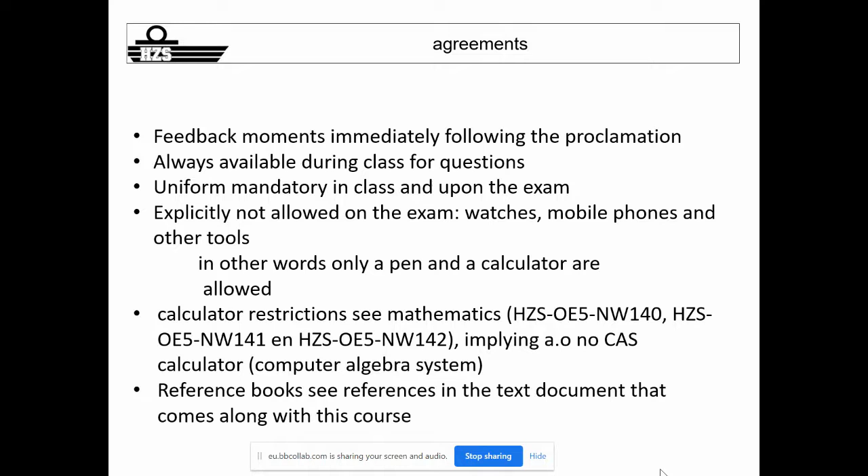Reference books are available, and there are quite some references in the Word document on Blackboard. There are a lot of books available in the library that you can consult. There's a new book used by the professors of stability, which is a good start for background and gives a good idea; it can only help you understand what we're talking about. But that's a bit up to you - it's a bit of homework. I will guide you through the philosophy and the principles, and you have to do it at home.

So what we will see with me: the first three lessons will be on forces on a ship's hull - shear forces and bending moments, which you're already aware of from Ship Construction 1. We will do some simple beam calculations; that will be for today. Next week we will go to a more block-type vessel, calculating shear forces and bending moments like a ship on a simple beam principle. Then in the last course with me, you will do translation from all those forces to stresses.

Because you know that we are not allowed to cross the yield stress - you might still be aware of that terminology from last year. If not, please revise what a yield stress is. You have to stay below yield stresses to keep your vessel intact, so you can only work within the elastic region of your material. You need to have an idea of the stresses. The naval architect will not give stress limits to a captain that he is not allowed to cross, but will express it in shear forces and bending moments.

But as you are here for an academic program, you need to know a bit more than just the basics, which means you need to know what's behind shear force and bending moments, and that the architect will do the translation for you to stresses, and only give you limits for shear force and bending moments, which is quite easy to reason and calculate in a way.

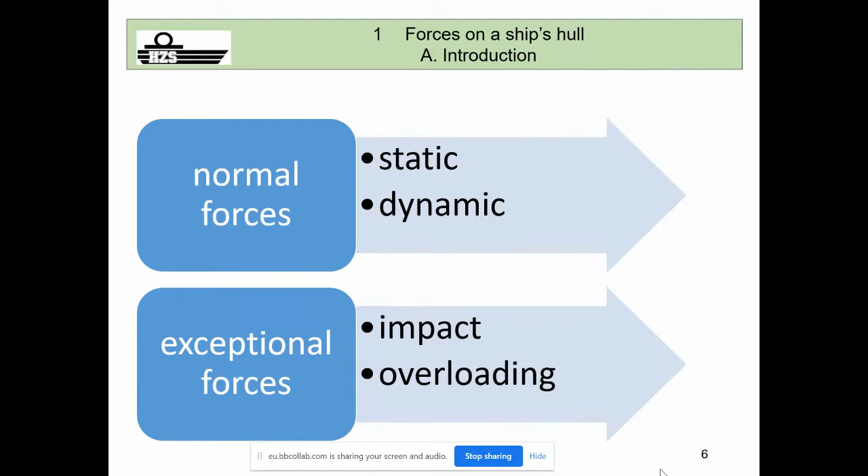Besides normal forces, there are exceptional forces like impact, damage, overloading, which are not normal and considered exceptional. A naval architect will take these into consideration up to a certain limit. Explosions he can't take into consideration - it's not normal to happen, and if it happens, yes, you have damage. That's normal. But the naval architect will for sure take into consideration all the normal forces that your vessel needs to stay rigid and intact, plus exceptional forces up to a certain level limit, not further than that.

Normal static forces, as I told you before, involve weight distribution. Up to now, for transverse stability as you already had, your weight is taken into account as one vector - all the weight as one single figure, one vector acting at the center of gravity of your vessel. This is nice for stability purposes, but when it comes to shear forces, bending moments, and forces leading to stresses on your vessel, we want another approach: we look at the distribution of that vector along the length of your vessel.

The distribution along the length of your vessel is not the same up front as at the back - it's like a mixture of highs and lows over the entire length of your vessel.

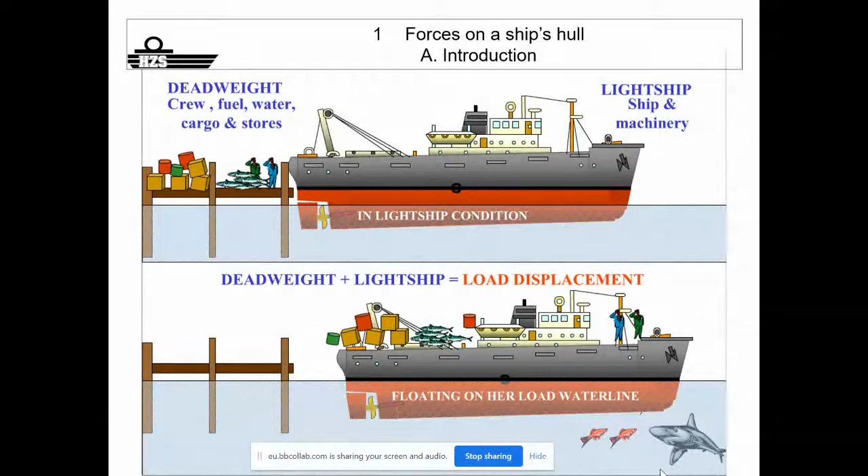What is the total weight? You should know it: light weight plus dead weight equals displacement - light ship plus dead weight. In case you still have problems with this, please do not hesitate to contact me, but you have to know this, as throughout one of the exercises it might really be useful to have an idea about this.

What else is working on your vessel, seeing as it's a static force? It's a buoyancy force. Your vessel, as you know, is not sinking, is not flying, meaning it's being carried by a certain reaction force, which you can see as the Archimedes force, or the buoyancy force.

Up to now, same story. You saw it as one vector of which the height is equal to the displacement of your vessel, the water displacement, which is eventually equal to the total weight of your vessel. This vector has not the same point of application. The weight of your vessel takes place in the center of gravity, the total weight, like my total weight, I also have somewhere a point of gravity in my body where it takes my vector of my total weight.

When it comes to the buoyancy force, the Archimedes force, it takes place in the center of gravity of your underwater vessel. Why? The Archimedes principle states the buoyancy force equals the weight of the displaced water, and the weight of the displaced water equals the underwater volume of your vessel multiplied by the density of the water. So your underwater volume is representative for the buoyancy force, and the center of gravity of your underwater vessel is the reference point for your buoyancy force.

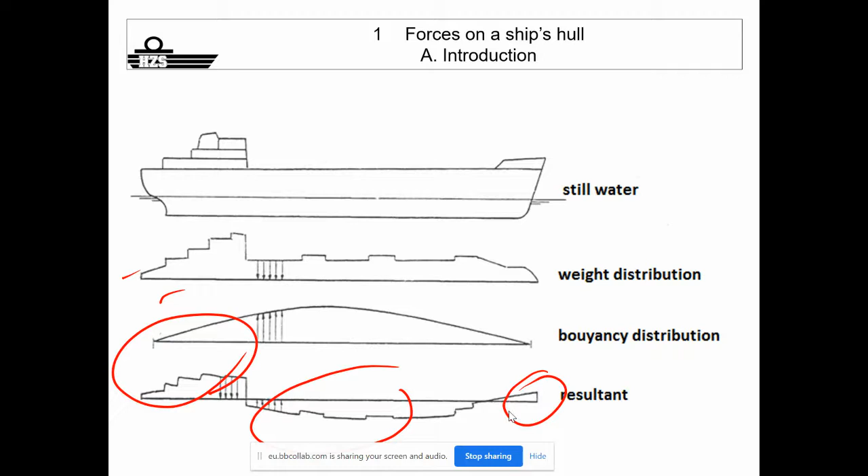of your vessel. An empty vessel, as you will know, has a weight distribution of a minimum ballast condition. Ballast condition is an empty vessel, meaning that all the ballast tanks are filled with water to guarantee a certain weight, a certain minimal stability in a way.

It means that in that way your vessel tends to hog, and with a vessel tending to hog, you see that the resultant forces are more positive in the middle and more negative at the ends, and your vessel is doing like this. When your vessel is fully loaded, you just have the opposite, and your vessel tends to sag due to the static distribution of all the weights.

Beside those statics, you have the dynamics. Waves, green water, this is an example. Slamming is an example.

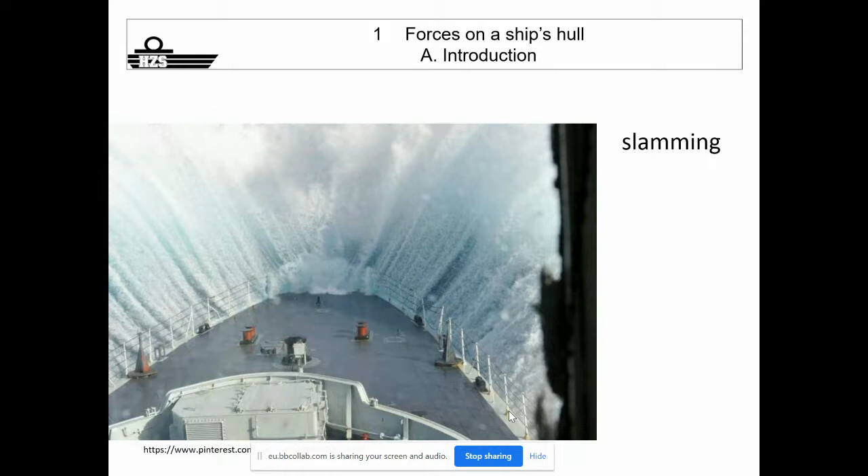So slamming is also part of the operation - as I saw, I just pressed accidentally the mute button, but just in time. So slamming is also part of it. It means that a naval architect has to take into consideration all those forces as well, because all those forces your vessel is also exposed to and will also lead to shear forces and bending moments.

You take 1/3 of the highest waves that your vessel is designed to navigate into consideration, and the average from that is your significant wave height. That's a value which the naval architect will use to calculate all the stresses that your vessel will be exposed to, the dynamic sea state.

Because he has to know all the stresses that you encounter. Very important side note: vessels are designed for certain areas to navigate. Your vessel cannot necessarily just cross the Atlantic if it's not designed for that, your vessel will not withstand all the stresses that come along. A vessel is designed for certain areas. Normally, if nothing is mentioned, according to the rules, it will be in North Atlantic conditions.

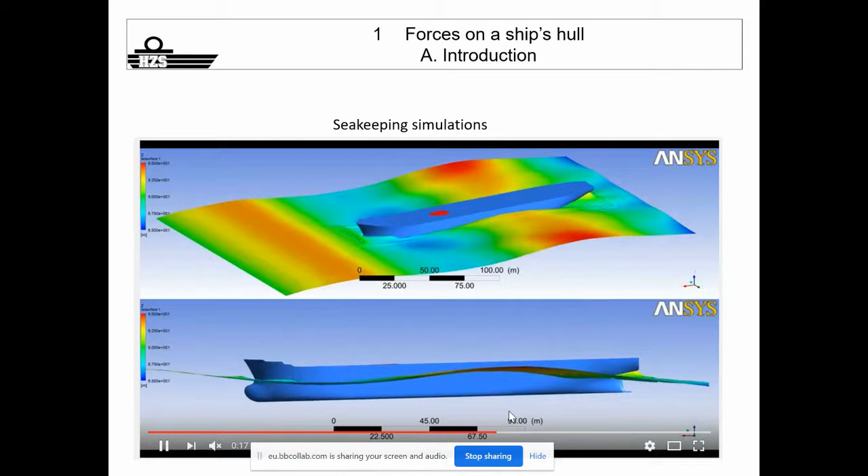Naval architects make use of finite elements to evaluate sea states and stress in the structure. This is always done by simulations, computer-based programs, which are quite good, but it stays an approach. It's only an approximation of reality. You always have to keep that in mind.

We always have to take account of safety margins. Naval architects take into account a safety margin, meaning that you will never use the yield stress as a final limit. It will also be the yield stress taking into account the safety margin. It's very important.

Exceptional forces normally are not taken into consideration for the merchant marine. I'm not talking about the navy, that's different, but for the merchant marine: collision, grounding, explosion, to a certain extent, but there's a certain limit. It's not designed for a full collision or explosion.

So these are things that can happen, and that leads of course to damage, and that's most of the time linked to operational errors from, let's say, the captain, because he has the final responsibility.

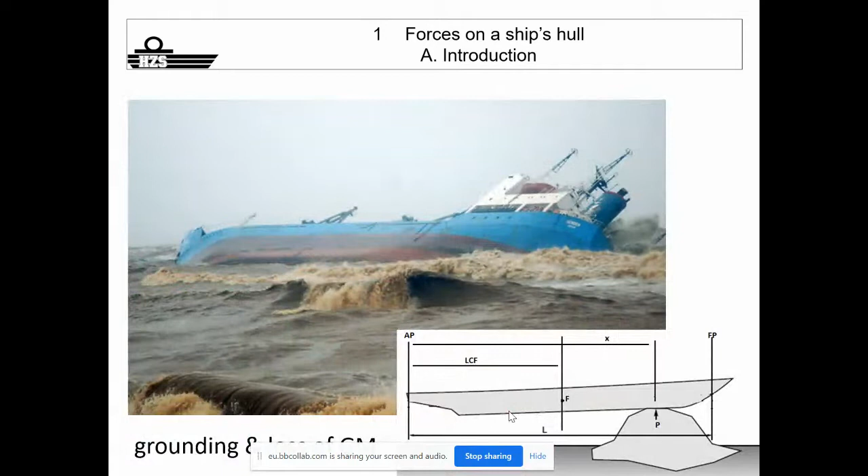Overloading is also something that happens, and which is a responsibility of the people on board, and that's why we treat it. Because all those dynamic things I'm talking about are not within your hands. If you go navigating, you can't control it. It's the responsibility of the naval architect.

But the one thing you can control is how you charge your vessel, how you distribute all the forces. That's why it's important that we teach this to you, so that you have an idea what's going on behind loading and discharging, and shear forces, bending moment, and stresses.

To make the calculations easy on board, what do you have? You have computer programs that do everything for you. Nice and easy, but you have an academic background, so you need to know what's behind it.

To make your life easy and simple, we will always compare a vessel with a beam. A beam can be detailed, so that you really have side shells and girders, like you will see at the end in a Word document. You will have a new exercise for those who already follow the course, like a real profile of a vessel with a tank top, center line girder, side shells, walls with certain dimensions, and then you can do calculations.

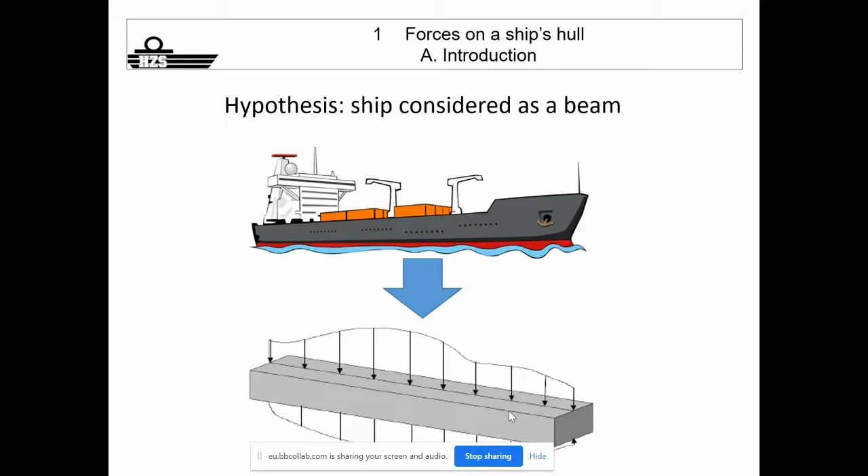You can simplify it even further and compare a vessel with an I-profile beam. So both approaches exist. If you compare a vessel with an I-profile beam, then the top flange is considered as the sheer strake, the top deck. The bottom flange is considered as the double bottom, and the side web is considered as all the longitudinal things running fore and aft.

So meaning the side panels of your vessel and all longitudinal bulkheads, which are quite solid up forth. That's the side web. And if you simplify it like an I-profile beam, the behavior of this beam is really comparable to the behavior of a vessel. And that's why it's easy to use this as an example, and also in exercises, it's a nice approach to simulate what happens on board of a vessel.

So you know that a vessel bends, hogs, sags. Hogging and sagging leads to compression and tension. What you saw in ship construction 1 is that the compression and tension is the highest at the outer flanges. So if you go like this, sagging, then you have tension in the bottom, and in your deck compression. A vessel is not only subjected to hogging and sagging.

As we saw, the weight distribution of our vessel tends to have positive and negative parts, meaning that if you chop it into pieces, all the pieces of your vessel will have a different height in the water, a different freeboard. Meaning that if you glue them all together, you will have tension, stresses and forces perpendicular to your plane. The shear stresses are the highest in the middle in your web. But those are things that we saw in ship construction 1. So it's important that you revise that part, and then you really capture the entire content of what is necessary.

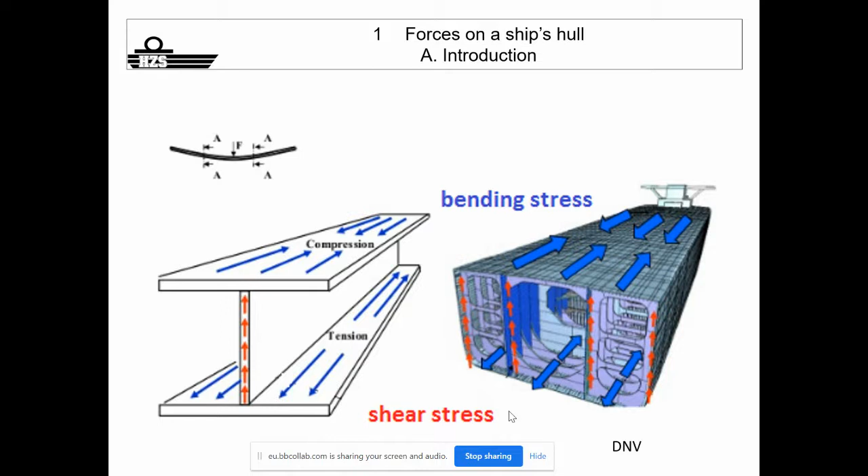You can't just say, oh, I will just do the exercise and that's it, I succeed because Remke's part is only exercises, correct? But you will go navigate. You have quite a big responsibility later on board. So it's necessary that you understand the global picture.

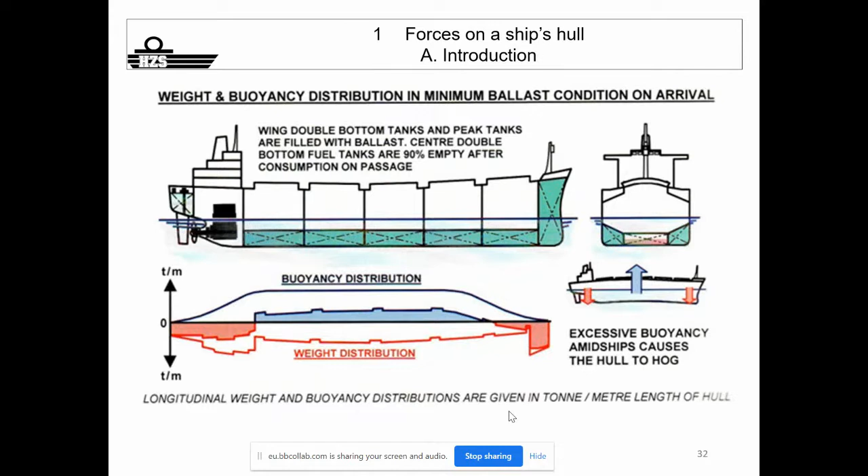So here you see an I-profile beam, and you consider it in this case like the vessel. You neglect Archimedes a bit, and you see it as carried by wave tops at the bow and at the stern. And then the total weight is visualized here as being the biggest in the middle. And it gives you indeed sagging, but also bending moments internally. What is internal and external, we'll come back to that later on. The same goes, of course, with hogging. These are all visualizations you can use, an I-profile beam compared to a vessel.

If you look at the weight distribution of your vessel, you might weigh more at the ends and less in the middle, for sure when you're empty and in ballast condition. Your vessel tends to hog. If you chop it into pieces, what do you see? Every piece has a different freeboard. So wait. If you look at this part and you're located here, what do you see? This part tends to go downwards. But in reality, it's all one piece. So it means that internally, you have at this location a reaction force. And that's the shear force.

So your shear forces you can approach as a result from external forces, which is the weight in this case. And then internally, your material has to counteract because it doesn't want to crack. It's all glued together. And that's the shear force. Another way, you can see this pen. What does it also do? This is your person, and this is the end of your vessel. This pushes downwards. What do you see happening? You see a moment happening. It tends to angulate this part. In reality, it's all glued and stuck together.

So besides only shear forces, this is trying to turn downwards, and you will have a reaction force to counteract. So you also have bending moments to counteract the bending moments that your vessel is exposed to. And those internal shear forces and bending moments lead to stresses, and those stresses should not be higher than certain limits. And that's actually the red line through the entire story.

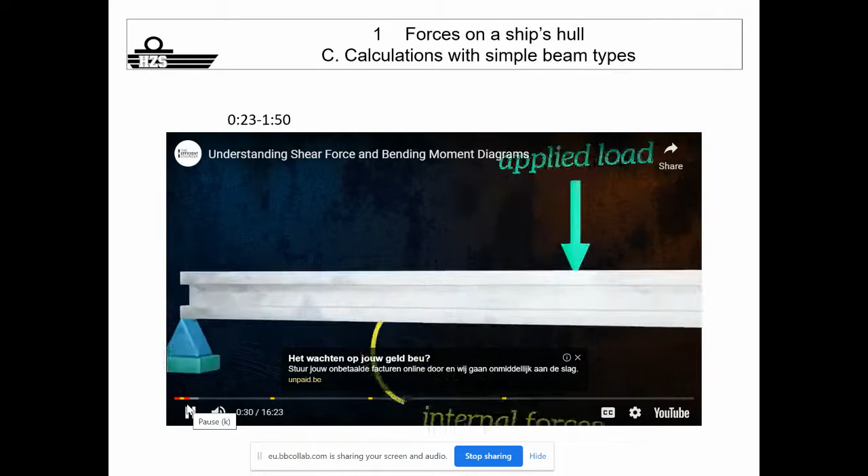When a beam is loaded, internal forces develop within it to maintain equilibrium. These internal forces have two components. We have shear forces, oriented in the vertical direction, and we also have normal forces, which are oriented along the axis of the beam. If the beam is sagging, the top of the beam will get shorter, and so the normal forces in the top of the beam will be compressive.

The bottom of the beam will get longer, and so the normal forces in the bottom of the beam will be tensile. Each of the tensile normal forces has a corresponding compressive force, which is equal in magnitude but opposite in direction. As such, these forces don't produce a net normal force, but they do produce a moment. This means we can conveniently represent the internal forces acting on the beam cross-section using just two resultants. One, shear force, which is a resultant of the vertical internal forces, and one bending moment, which is a resultant of the normal internal forces.

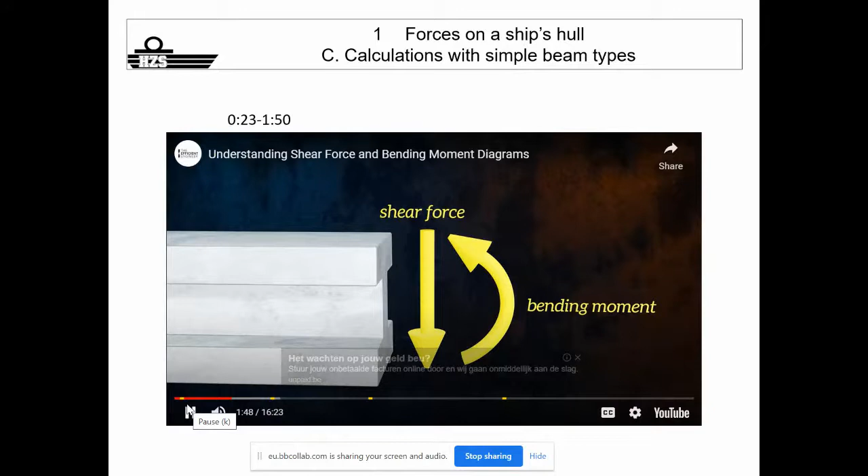This is a very common way of representing the internal forces within a beam. Drawing the shear force and bending moment diagrams is just figuring out what these internal forces are at each location along the beam. These resultant shear forces and bending moments will depend on the loads acting on the beam and the way in which the beam is supported. Beams can be loaded in a number of ways.

Okay. Voilà. Sorry, I have to switch back to English.

So this is another approach of explaining that indeed, if we talk about shear forces and bending moments, that will eventually lead in the third course to the calculation of stresses. We always consider the internal shear force and bending moments, which should not rise above certain limits, otherwise you have failure. And for sure, when you enter the plastic region, then it's considered as being failed, because we do not want permanent deformation. Elastic deformation is normal, but permanent deformation we do not want to reach.

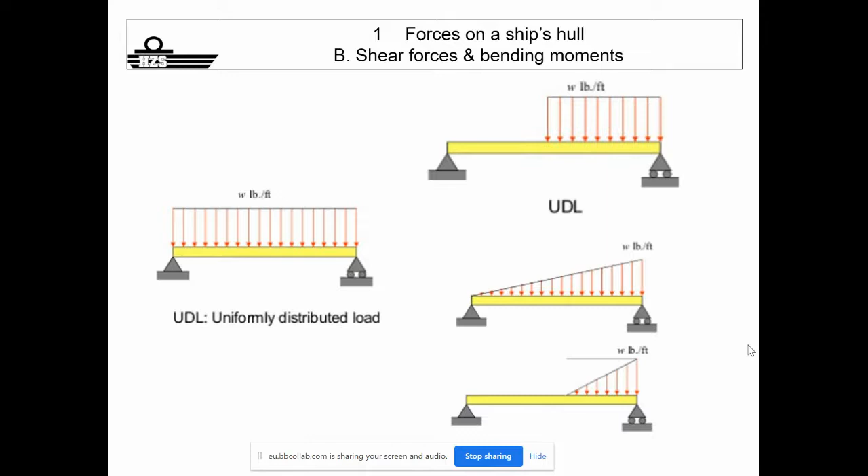Okay, how do you have to see loads in the calculations we will make? We will do simple beam calculations for today. Then you will see concentrated loads or point loads. It's like, for example, a car on a deck. Every wheel will have a certain point load. You will also see uniformly distributed loads, like for instance a freshwater tank filled with water, which means so many tons divided over the floor of the tank. So it's a uniformly distributed load. The same we can translate to simple beam calculations.

On board, most of the parts will be considered as being clamped on both ends. You do not have free ends, you have both fixed ends, but you can also have in beam calculations a free end and a fixed end. You have panels which are supported by, for instance, reinforcements, girders. They reinforce the tank top, and then you have supports, that's also possible, and you can simulate all that as well by simple beam calculations.

If you look here, how to calculate those internal shear forces and bending moments, I told you they relate to the external forces, and this is a nice visualization. You see here a beam fixed in a wall and free at the other end. At the end, the beam is being pushed upwards by a certain force P. So your beam tends to go upward, but nothing happens because it's in equilibrium. That means that internally, if you're a fiber in that beam, you have to counteract that force with a certain internal force.

And then you see this here. No, I have to be here with my pen. Internal force V. For the beam to be in equilibrium, the reaction force has to be the same as the external force. So you can easily calculate the internal shear force on the basis of the external force P. What is the moment? Imagine yourself positioned in that cross section, MN, here. Somebody pushes upwards.

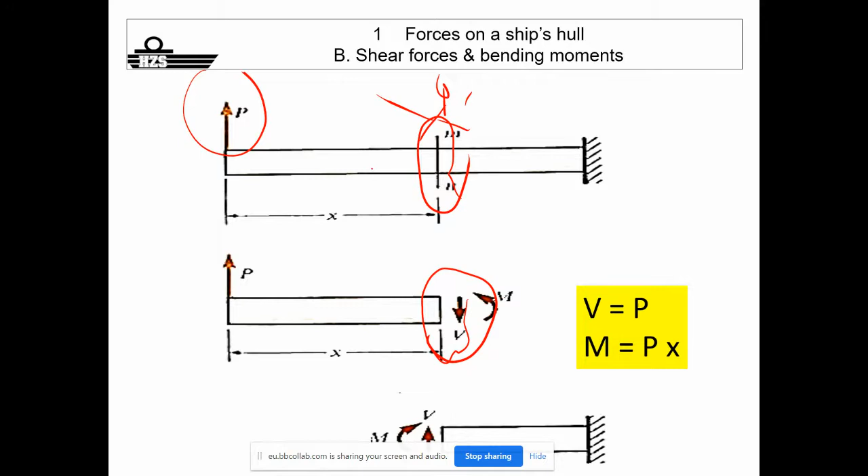What do you see? This beam has a moment that tends to do this. How do you define that moment? The moment is force multiplied by arm. It's P multiplied by that distance x. Here, distance x. Yeah?

For your beam to be in equilibrium, that internal moment at that position where you're located, the cross section MN, equals what? P multiplied by x. It has to counteract that moment to be in equilibrium. And that's the basics. So the external forces will determine what happens internally, what you have to counteract. And those forces and moments eventually will lead to tensions that have to stay below limits that the naval architect will give you.

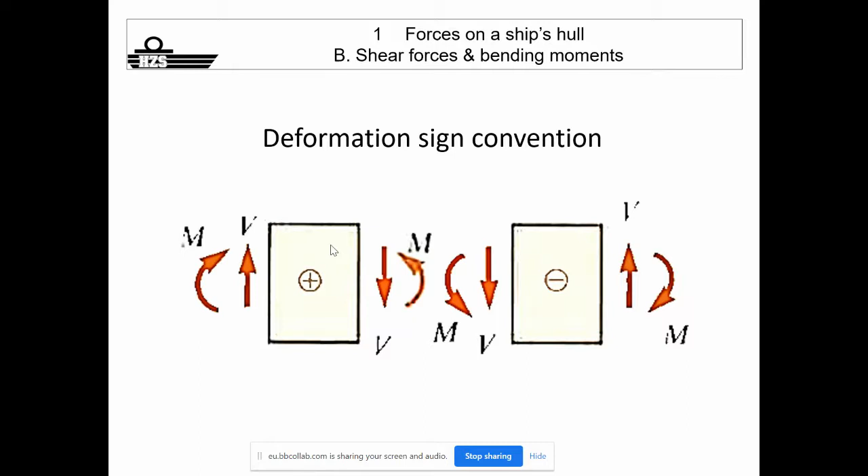Sign conventions: since we do exercises, of course, we need to keep to a sign convention. We have deformation sign conventions. You can do it depending on happy faces, sad faces. Usually I use the static ones. The static ones means that everything which is tensile is considered positive, compressive is negative. All the forces acting upward are positive, downwards I consider as negative. For moments, if you go clockwise, positive, counterclockwise, negative.

In a way, you can do whatever you like with those sign conventions. Just put somewhere on a piece of paper the convention that you use and use it throughout the entire exercise. That's the most important thing. If you swap in between, your answer will not be correct. So use a sign convention and use the same approach for your entire exercise. Eventually, your result can be positive and I have negative, or vice versa. It's no problem because the absolute value is the one that is necessary to take into consideration to calculate eventually

stresses. Your stresses can be tensile, can be compressive. Both should be below the yield stress. Whether we're talking about tensile or compressive, it doesn't matter. Both have to be below the yield stress. So I'm not so strict in the sign convention. Positive and negative can be swapped as long as the absolute value is correct. And you can only guarantee this by using the same approach over your entire exercise. Okay?

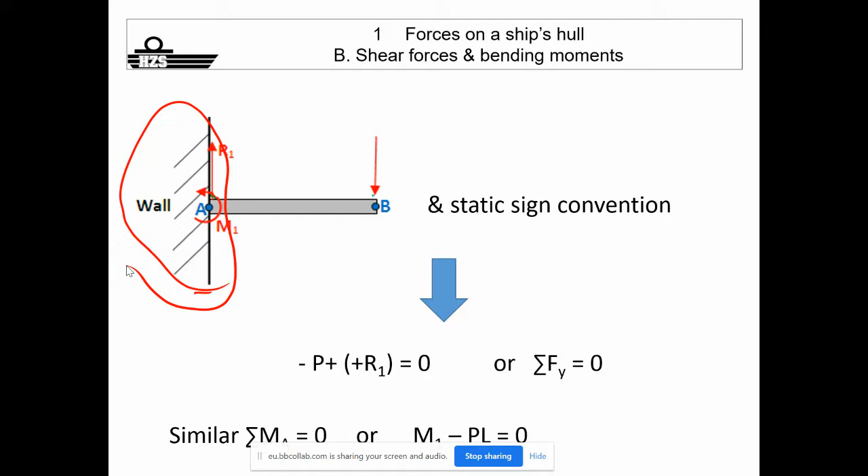So you have a reaction force considered as an outside force upwards when your load here at the end is downwards. You have a reaction force on the wall going upwards. This moment tries to move you this way, so you'll have a reaction force in the wall because it's not happening. That reaction force in the wall is also considered as an outside force. And the sum of all those forces has to be equal to 0. It will be one part of the exercises. Yeah.

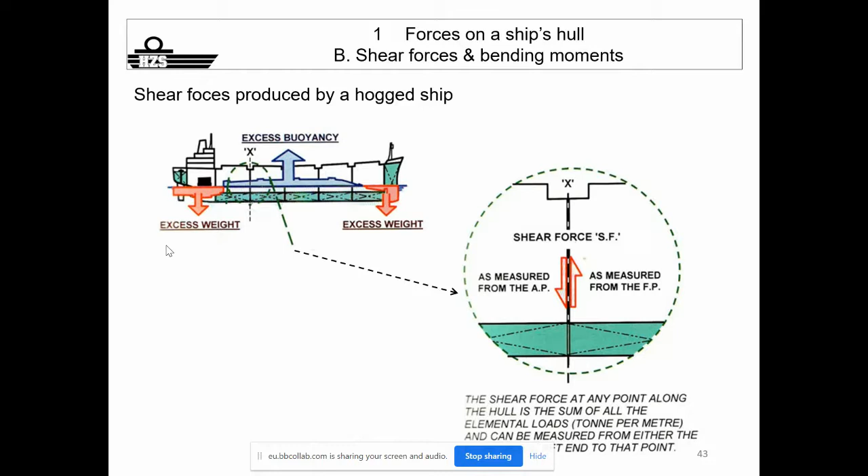Shear force produced by a hogging ship. Same here. The Archimedes force carries your vessel and is considered as an outside force. The weight of your ship is considered as an outside force. All those outside forces lead to internal shear forces and bending moments in your vessel. Okay? And that we will eventually calculate. Shear forces, bending moments, how to calculate. I will go straight first to the beam exercises and then I will come to this, or you can look at this later on, then it will become clear what it means.

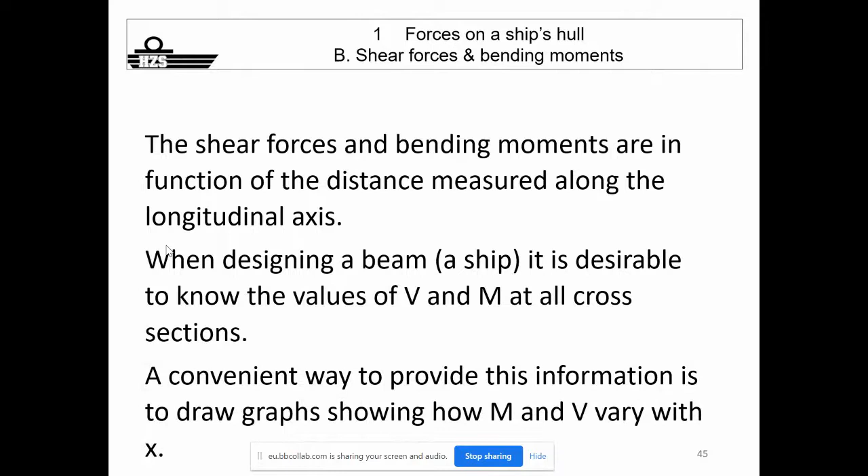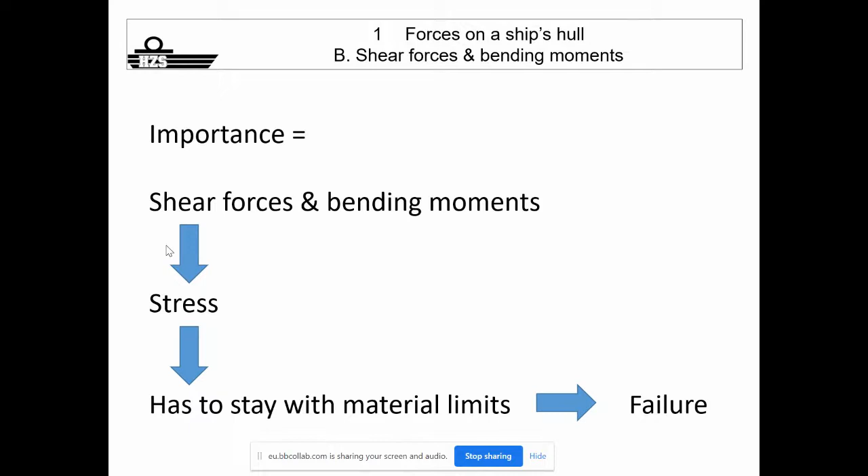Okay. How do you calculate shear forces and bending moments? This will eventually lead to a vessel. This is computer-based programming that will illustrate it on board, but you need to know the principles, comparing this vessel with an I-shaped profile beam. The importance, as I told you, is that they are linked to stresses, and stresses have to stay within limits, otherwise you have failure. You have to stay below the yield stress, within the elastic region. And that's the red line through all the exercises.

The roller support allows your beam to move left and right, and it allows your beam to have a moment. It only restricts movement in the vertical direction, meaning a roller support leads to a virtual external vertical force, because it limits movement there, and you eventually have a reaction force in that support.

A pin support will also restrict the movement of your beam in the horizontal plane, meaning movement left and right. So with a pin support you will also have restrictions at that level, and you have a reaction force, also considered as an external force.

When you go to fixed beam supports, as I told you before, you also have a moment to take into consideration, besides vertical and horizontal forces. Why I tell you all this will become clear when we come to example exercises.

Okay, a small introduction, or a summary in another way. Let's put it that way.

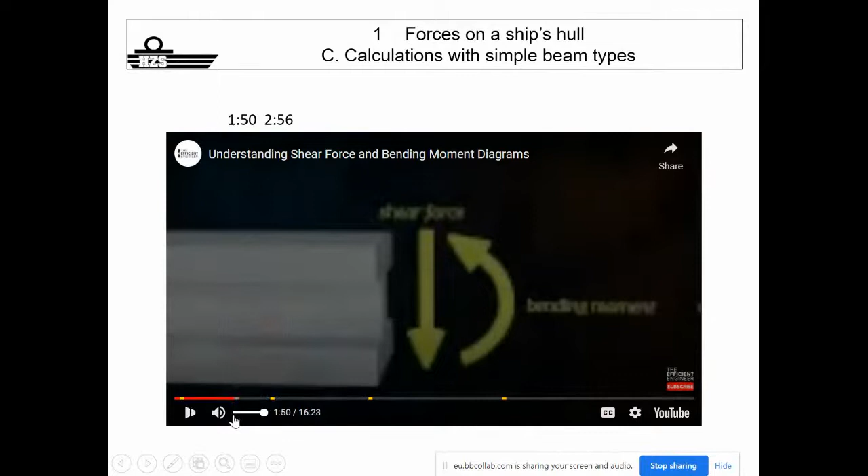A beam can be loaded in a number of ways, the most common being concentrated forces, distributed forces, and concentrated moments.

Beams can also be supported in a number of different ways. They can have pin supports, roller supports, or be fully fixed, which each restrain the beam in different ways. Pin supports prevent vertical and horizontal displacements, but allow rotation. Roller supports prevent vertical displacements, but allow horizontal displacement and rotation. Fixed supports prevent all displacements and rotation.

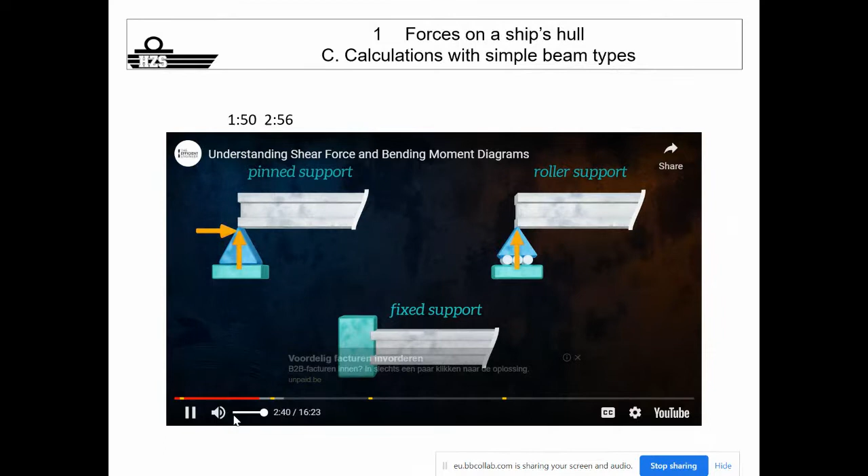If a certain degree of freedom is restrained at a support, we will have a corresponding reaction force or reaction moment at that location. For example, rotation is permitted for a pin support, so there is no reaction moment, but displacements in the vertical and horizontal directions are prevented, so we will have horizontal and vertical reaction forces.

So how do you determine the shear forces and bending moments within a beam?

Now, beams can have more than one support. A cantilever beam is only fixed in the wall. Fixed beams are fixed on two sides. Simply supported beams, which is most of the cases we will consider in the exercises, have one end freely moving in the horizontal plane and the other pinned. So your beam with a simply supported condition can move and can elongate depending on the stresses and forces being applied to it.

That, in the exercises, just to simulate what happens and what's all behind, is sufficient for now. And I only have with you three contact moments, six hours, which is not a lot, so we have to make some decisions and see what we treat and what we do not treat.

Classification of a beam: statically determined, that's what we are talking about. So your beam is in equilibrium, meaning the sum of all the moments is equal to zero, and the sum of the forces is equal to zero in the horizontal and vertical plane. That's the basis to be statically sound and statically okay.

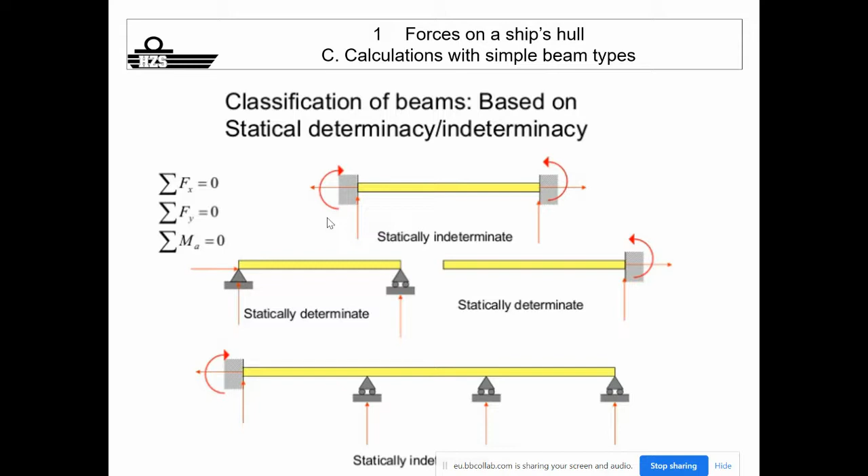And then you can go and look into what happens in the structure itself. What are the moments and forces in the structure? What are the stresses coming along, and do we stay below the yield point? That goes beyond this. Okay, a little continuation.

So how do you determine the shear forces and bending moments within a beam? There are three main steps we need to follow. First, we draw a free body diagram of the beam.

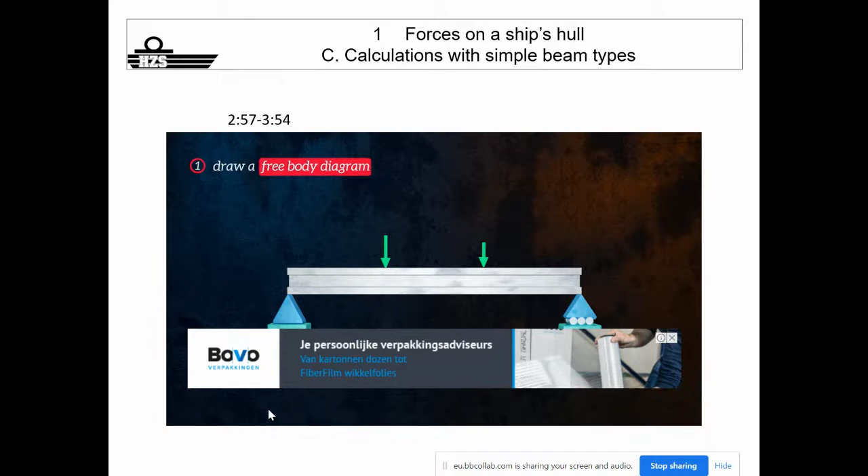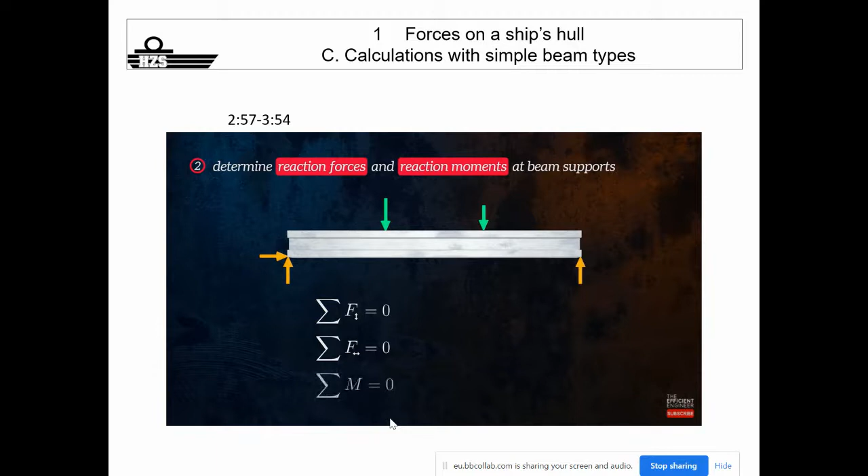This shows all of the applied and reaction loads acting on the beam. The next step is to calculate the magnitude of the reaction forces and reaction moments at all of the beam supports. We do this using the concept of equilibrium. To maintain equilibrium, all of the forces in the vertical and horizontal directions should cancel each other out, and similarly, all of the moments acting at every point along the beam should cancel each other out. This gives us a set of simple equations we can solve to calculate the reaction forces and moments.

If we can calculate all of the reaction loads using the three equilibrium equations, the beam is said to be statically determinate.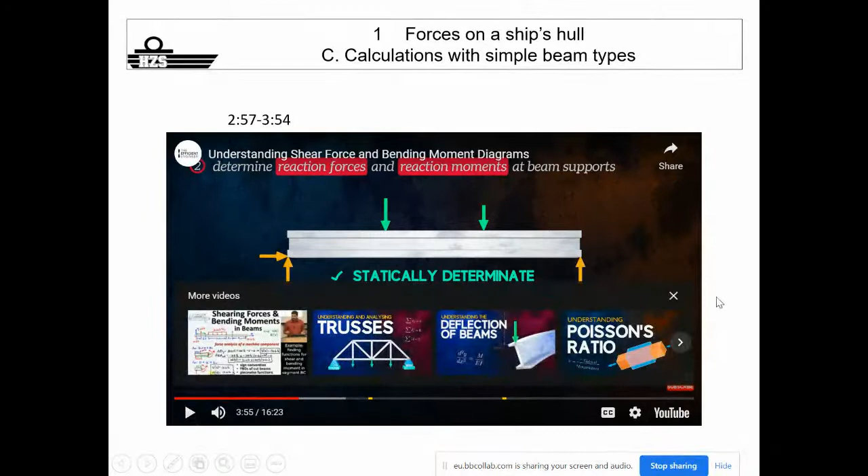For some beam configurations, like this, and that's it, we will only do this type of exercise where it's indeed statically nicely being able to calculate.

For example, what do you see here? A simply supported beam with a weight in the middle, considered as a concentrated load in the middle with a certain force W.

When you press in the middle of that beam with W, you know that your reaction forces in your supports, roller and pin support, in the vertical direction equal how many? What is R1 and R2? If you look here, you press with a point load W in the middle. You have a reaction force due to the pin support in the vertical direction. This one I call R1, this one I call R2. What is the height of R1 and R2?

Logically, most of you will say 50-50. Then you just divide it 50-50, which is correct if your point load is perfectly located in the middle. Then R1 and R2 are indeed equal to 50%, 50%. But it's not necessarily correct. If your load W is not perfectly in the middle, then R1, R2 will not be exactly 50-50%. Then the division will be different.

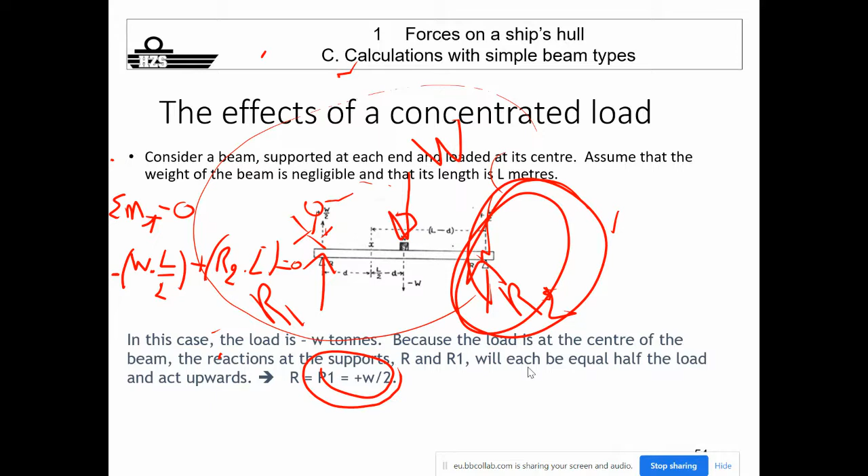If not, it's 0. So actually my point giving is easy: philosophy and figures correct, all the points. Philosophy correct, one simple error in calculation, you get half of the points. All other scenarios, 0. So if you make 4 errors in calculation, you also have 0. That's how I reason and how I correct your examination at the end.

And here you see the solution: how you do the approach with the moments around A, the moments around B, and the sum of the forces in the vertical direction.

Is there somebody who does not understand this philosophy of how to calculate the reaction forces at the beginning and end of your beam, where you have the supports, which are considered external forces? So far, so good. Okay, perfect.

The same principle and philosophy you will have to use when your weight is not perfectly concentrated in the middle, but located somewhere else.

Here you see an exercise in the course with actual values instead of x's and y's and R1 and R2. What do you see with those values? The shear forces. How do you calculate them?

We started by calculating the external forces here. We have 20 kilonewton, which your simply supported beam is exposed to, perfectly located in the middle, so we know it's a 50-50 division for RA and RB: 10 kilonewton on each side. That is all the external forces your beam is exposed to, and that you can calculate now.

What is now the shear forces evolution over your beam, and the bending moment evolution over your beam?

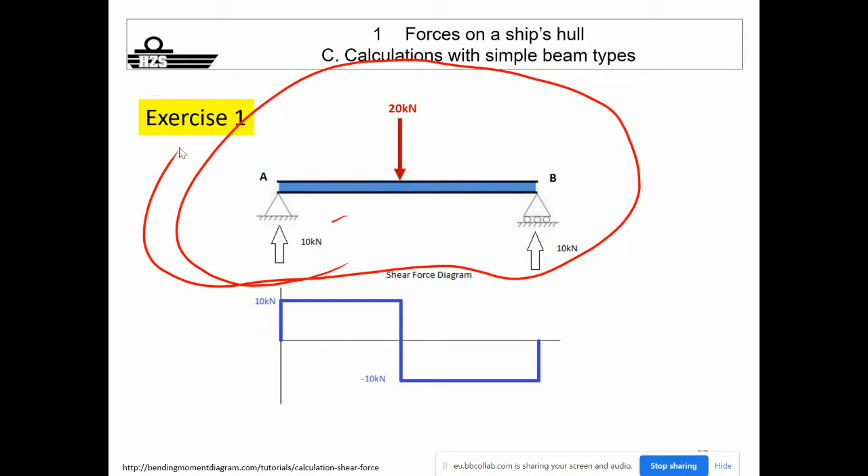Well, to know the evolution of your shear forces, you have to imagine that you're a microbe that crawls into your structure. First of all, you're located at this point.

If you're located just a fraction of a millimeter before your beam starts, then it's zero. But suddenly, just a fraction of a mathematically undefined distance from your start, you see that there's a force pointing upwards, an external force of 10 kilonewton, that has to be counteracted by your material in order to be in equilibrium.

That's why it's very important to make the distinction between external and internal forces. In our calculations, to look at the internal stresses, we need the internal forces and moments, which are linked to the external ones. So the internal force here has to be equal to 10 kilonewton to be in equilibrium.

Now, I'm a fiber that goes further along the beam, and I position myself here. What is the force that I need to counteract? Again, 10 kilonewton. So it remains 10 kilonewton just up to this point.

Up to this point, you will have to counteract not only 10 kilonewton, but also suddenly 20 kilonewton. So you have a drop and you go to minus 10, because 10 minus 20 is minus 10. If you're located here as a microbe inside your beam, you have to counteract all these forces, which is minus 10, and it remains minus 10 just up to the end.

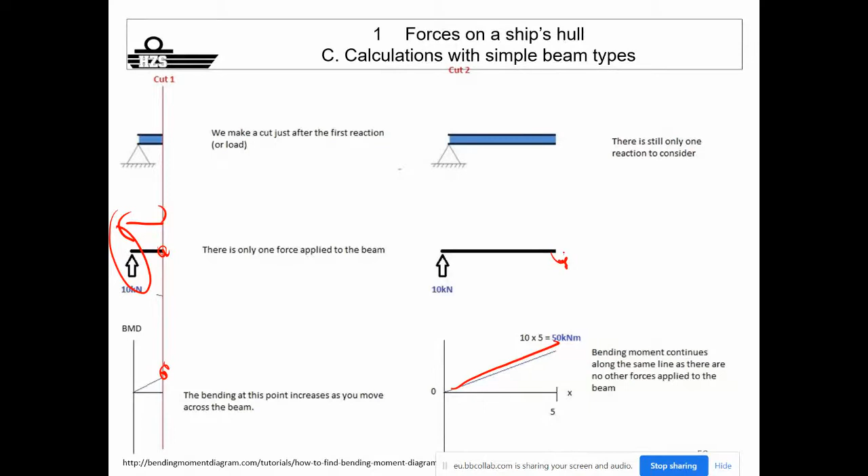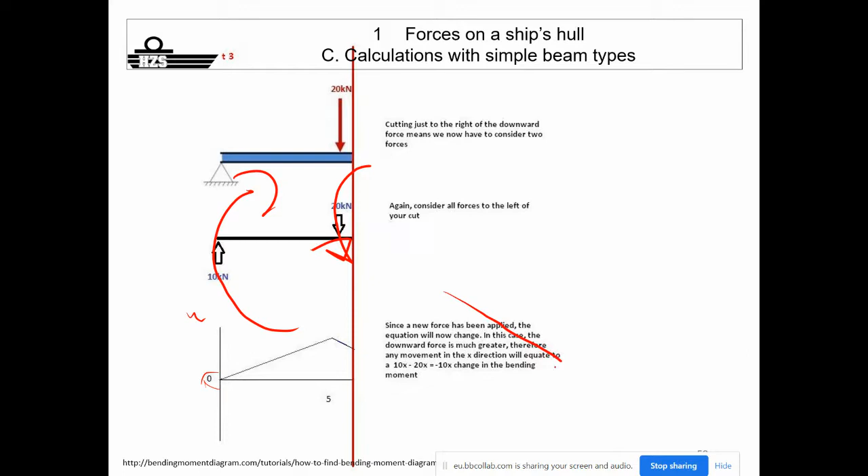And that's the approach of bending moments, and that's how you visualize bending moments. This is the total picture. Now, another approach, but explained by somebody else, in case you are not yet following what I was talking about.

Shear force. One second. Somewhere here should be... play. Calculated all of the reaction loads.

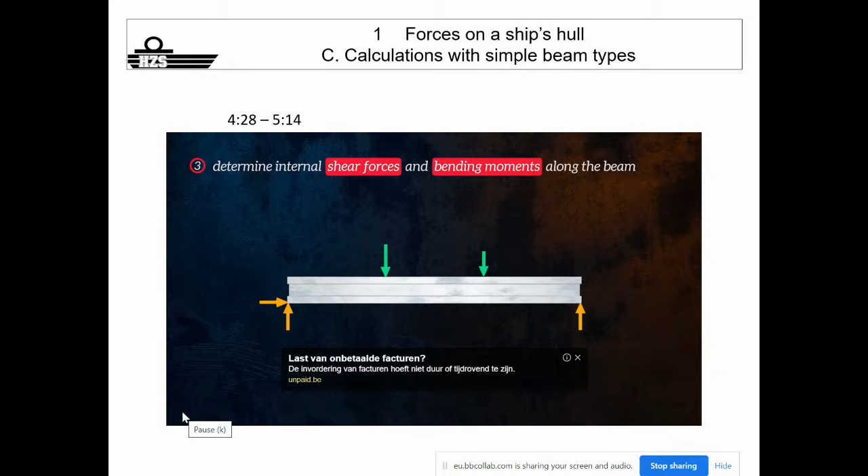The third and final step is to figure out the internal shear forces and bending moments at every location along the beam. To do this, we will use the concept of equilibrium again. If we cut our beam at any location, the internal forces and moments need to cancel out the external forces and moments so that equilibrium is maintained. This allows us to easily calculate the shear force and bending moment at each location along the beam. All we need to do is start from one side of the beam and move the location of the cut along the beam, calculating the shear forces and bending moments as we go.

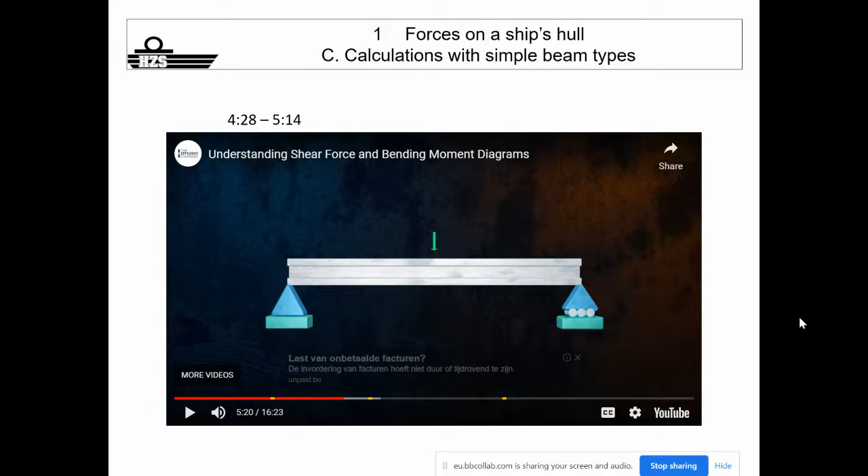Not for now. Okay, so you always have to look at external forces, they will give you internal forces, and it's the sum of all the forces, sum of all the moments that you need to counteract looking from one side, left or right, that's up to you. Yeah, you can choose.

Oops, that's not it. Here. Then you have an exercise of which you have the solution, because you will have to do it at home, of a point load not exactly located in the middle, but somewhere at 2/3 of the length.

You will need to calculate your reaction force. In this case, your reaction force is not 50-50%, so it will be a bit more on one end than on the other end. Following the same principle as before, calculate the sum of the moments around A, the sum of the moments around B. You come to an equation and you will find RA and RB. Exactly the same principle as before.

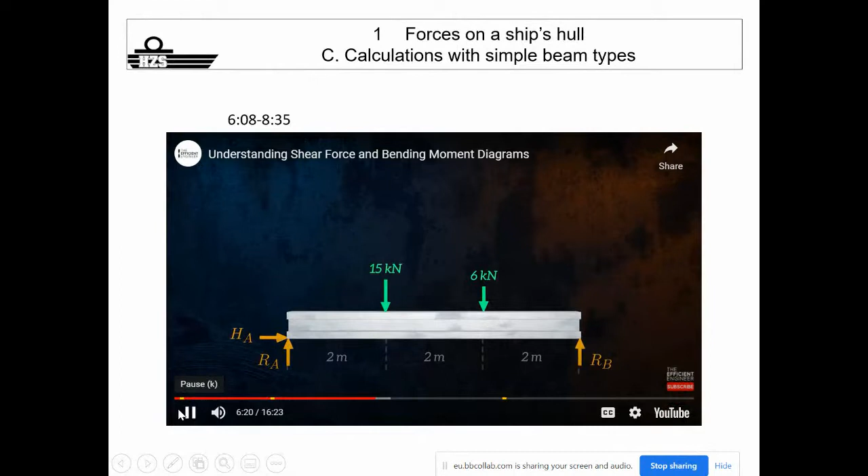We can then use the equilibrium equations to determine the unknown reaction forces at point A and point B. The sum of the forces in the vertical direction is equal to 0. So RA plus RB is equal to 15 plus 6. Because HA is the only horizontal force, it must be equal to 0.

We also know that the sum of the moments about any point along our beam must be 0. Let's consider the moments about point B. That gives us this equation, which we can solve to determine that RA is equal to 12. By substituting RA into the previous equation, we can deduce that RB is equal to 9.

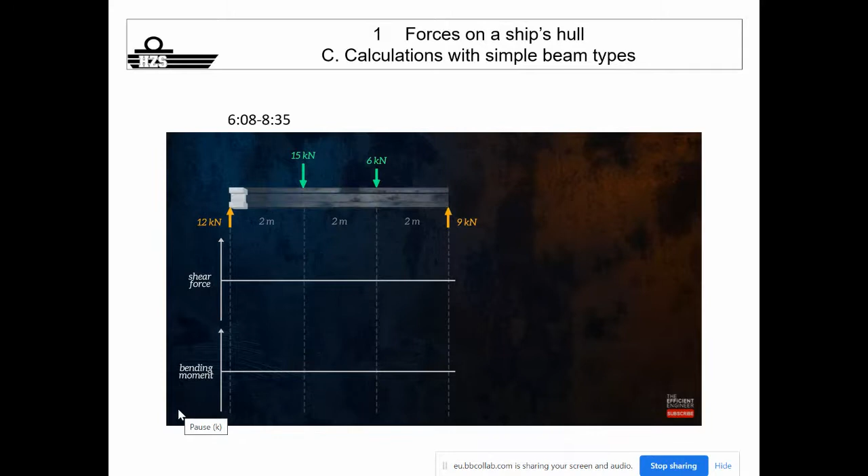Now that all of the external loads acting on the beam are defined, we can draw the shear force and bending moment diagrams. We will start from the left-hand side of the beam. Let's draw the free body diagram for a location immediately to the right of the 12 kilonewton reaction force.

To maintain equilibrium, the shear force must be equal to the reaction force. We can draw this on our shear force diagram. The shear force will be constant until we reach the next applied force. The bending moment must be equal to the 12 kilonewton reaction force multiplied by the distance x to the reaction force. This gives us the equation for a straight line, which we can draw on our bending moment diagram.

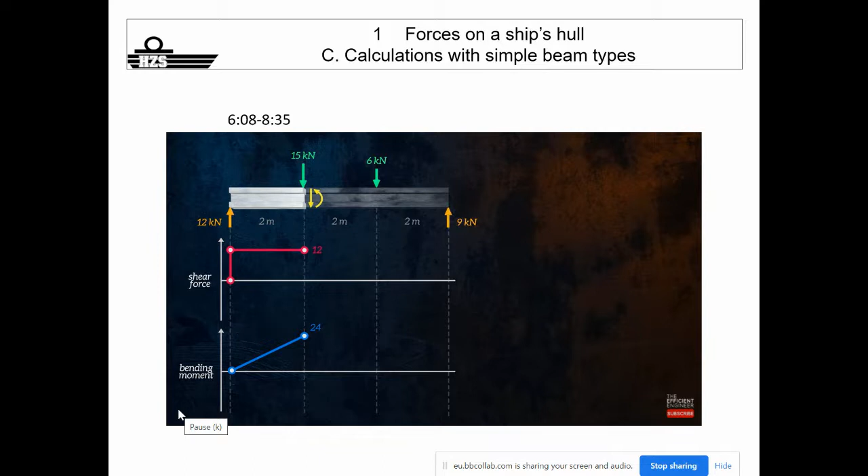We then repeat the process by moving the location of our cut further to the right. This time we place the cut immediately after the 15 kilonewton force, and we draw the free body diagram again to determine the shear force and the bending moment. We repeat this process until we have covered the full length of the beam.

We end up with the complete shear force and bending moment diagrams for the beam. That example was a fairly simple one.

If we look here at this visualization, is there somebody who noticed something? Can you relate the forces to the shear forces? Can you find a relation between the shear forces and the bending moments? Somebody who can see it? So meaning that there might be a relation somewhere between the forces, shear forces, and the relation between shear force and bending moments.

Something that you should have seen, I think, in mathematics: integrals. You have learned integrals in mathematics. Yeah, the bending moment is indeed the integral of the shear forces. What is an integral? An integral gives you the area underneath the curve.

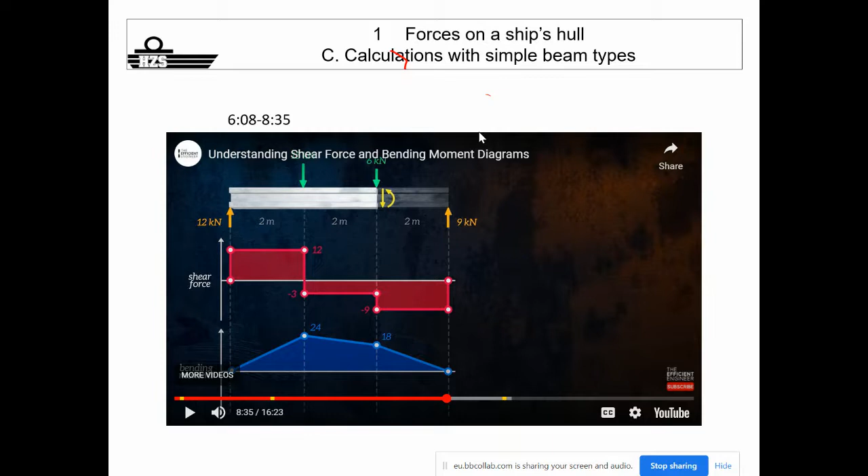Know that computer programs use integrals, of course, because it's not that simple anymore when you go on board. So these are exercises you can easily do at home - a simply supported beam with one load or two loads, as we just saw in an exercise, the solution you have in the Word document with the values. You saw a nice example with the evolution of the diagrams. You need to be able to draw those diagram evolutions as well - not only values, but I need to see how it evolves, the shear force, the bending moments over the length of your beam. Now, what do you see here?

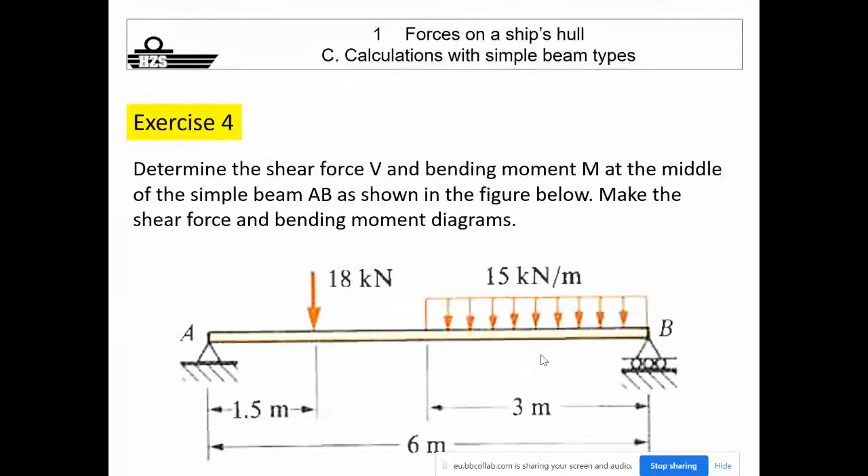I think I have another example. This is another exercise, but this is what I want to show you. One moment. Shear force. Yeah, there's also an explanation with your integrals if you like, but that you will see at home. I will go straight to the simplified model calculation.

There you go. Here we have a cantilever with an applied concentrated moment of 120 kilonewton meters and a distributed force of 6 kilonewtons per meter. Again, we start by drawing the free body diagram. Because the support is fully fixed, we have vertical and horizontal reaction forces, RA and HA, and reaction moment, MA.

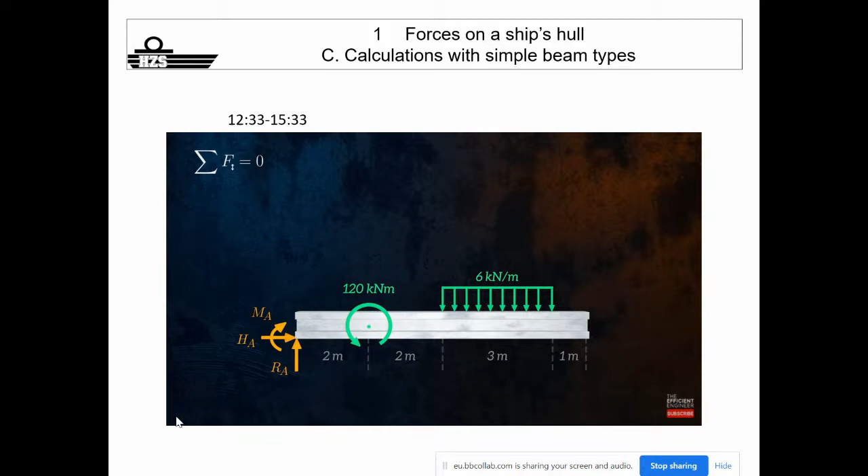Let's look at our first equilibrium equation. The sum of forces in the vertical direction is equal to 0. In this case, the only forces acting in the vertical direction are the reaction force RA and the distributed force. So RA is equal to 6 times 3, which is 18. HA is the only force in the horizontal direction, so it must be equal to 0.

Next, we can take the sum of the moments acting at point A. In calculating the moment caused by a uniformly distributed force, you can remember that it is equal to a concentrated force located in the middle point of the load. This gives us MA equals 21.

To calculate our shear forces and bending moments, we will start on the left side of the beam and move towards the right. This is our first free body diagram. The shear force calculation is easy, as we only need to consider the reaction force of 18 kilonewtons. The bending moment needs to take into account the reaction moment and the reaction force.

At x equals 0, the bending moment is equal to the reaction moment of 21 kilonewton meters. As we move to the right, we also need to consider the moment caused by the 18 kilonewton reaction force. This gives us the equation for a straight line.

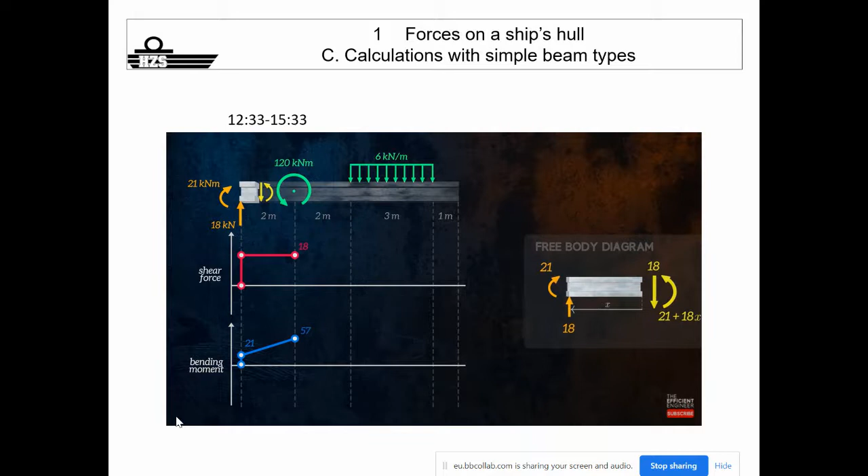We can then move our cut to the right of the concentrated moment. The moment won't affect the shear force, which will remain constant at 18 kilonewton until we reach the distributed force. But it does cause the bending moment to suddenly drop by 120 kilonewton meters. After the drop, the bending moment is again defined by a straight line. Things get a little more tricky when we reach the distributed force.

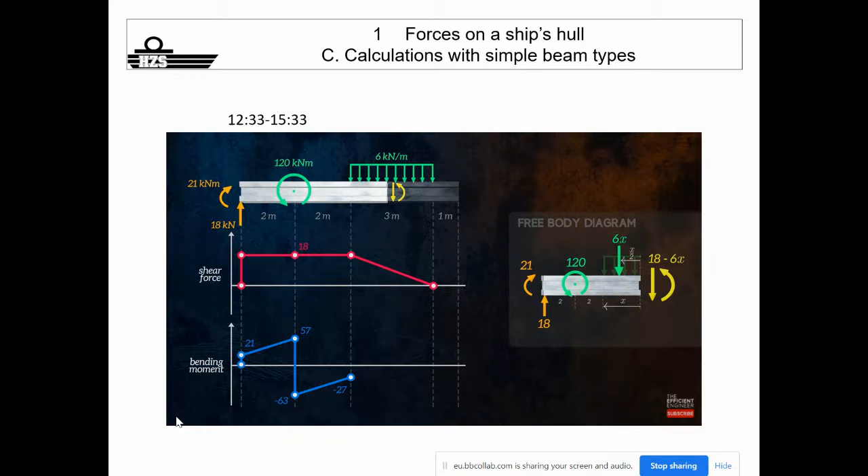We can replace the uniformly distributed force by an equivalent concentrated force with a magnitude of 6 multiplied by the length x over which the force is applied. This force is located at a distance of x over 2 from our cut. We can then calculate the shear force and bending moment equations using the normal approach. The bending moment in this section of the beam is defined by a quadratic equation.

No loads are acting on the small 1 meter section to the right of the distributed force, so shear forces and bending moments in that section will be equal to 0.

Okay, so you see there are equations appearing. It's nice for those who want to do it with equations. On the examination, I will ask specific values at certain points, and it's up to you to interconnect those points. If you want an equation to be able to calculate every little dot along the beam, fine by me. But upon the exam, I will ask you, I need shear force and bending moment values at location.

Tap, tap, tap, tap, tap. Might be 5 points or 6 points along your beam. And I need a visualization of the evolution. And it's up to you. You can reason yourself if it's linear, nonlinear, goes upward. If it goes downwards, you have to interconnect those points. If you really want equations and calculate every point along, fine by me. But the only thing I want is that you capture what I'm trying to teach you.

So I need values at certain positions and I need to know what happens between those points. It can be a sketch. I will ask you upon the examination to take two color pencils, like a marker, and you have to mark what is linear and non-linear. And then I see if you followed the content, yes or no, and what I'm trying to tell you. Okay. So far, so good.

I will just explain this one after a little break because I see we have time and I think you all need a little break as well to get something to drink or just to breathe and get some fresh air outside. Just realizing now that you do have homework in making exercises. I'm sorry, but indeed you do. And then I will just make one more exercise with you today to finalize this.

And this is a distributed load which is not horizontal, but which has this variation along the beam, which is not the same at the start and the end. And how to approach this in a simple way. You can do it again with integrals if you like, be my guest, but I will give you within 5-10 minutes a simple approach to solve this problem. Okay? I'll talk to you in 5 to 10 minutes again.

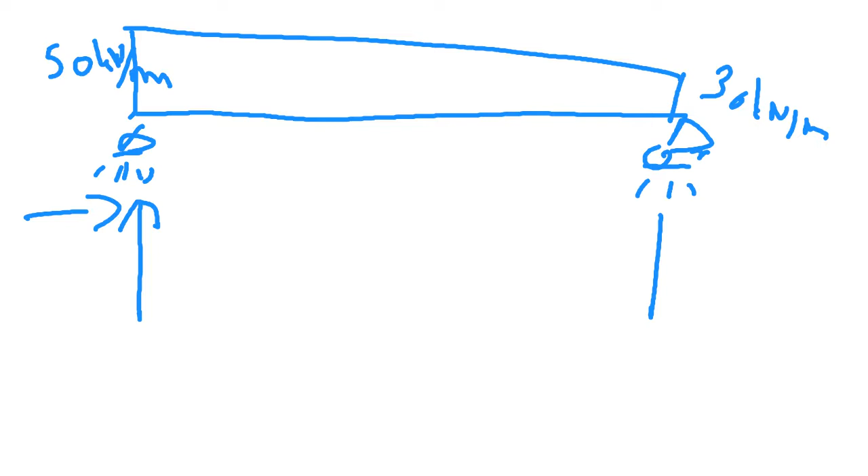We have a simply supported beam, roller on one side, pinned on the other side, distributed like this, if I recall well. 50 kilonewton per meter on this side, 30 kilonewton per meter on the other side. We already know by the pin support here we have a reaction force vertically as well as horizontally. We have here a reaction force only vertically. Horizontally, there's only one, so this one is equal to 0 and we can neglect it.

How do we end up with a value for RA and RB? By taking the static equilibrium equations into account. But first, we're going to make a simplification. We're going to divide this distributed force in two. So what do you see appearing? You see a horizontally distributed force, equal to 30 kilonewton per meter along the entire length of the beam, and you see a triangle appearing. From the first part, we know we can make a resultant force of 30 kilonewton multiplied by the length, and the length is 2 meters, I guess. We have 60 kilonewton taking place in the middle of the beam.

But for this triangular shape, it's a bit of a different story. How can I change the color? No idea. For this triangular shape, we all know the resultant is base multiplied by height divided by 2. So the length of the beam, 2 meters, multiplied by the height, and the height is here: 50 minus 30, which is 20 kilonewton. So 20 kilonewton multiplied by 2 divided by 2 is indeed a resultant force, but it does not take place in the middle of the beam. Where does it take place for a triangular force?

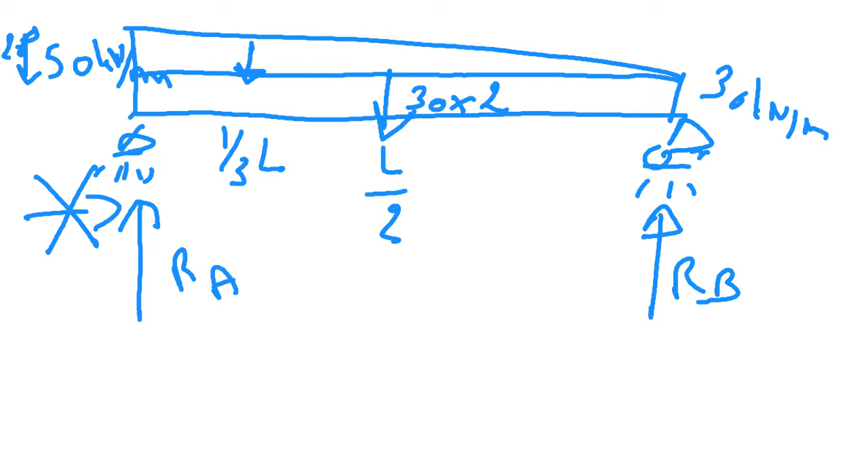And now you can calculate RA and RB easily, because you have a simplification with 2 point loads along the beam at specific locations. And that you can calculate then. So what is 1/3 of the length? The length is 2. So the half is at 1 meter.

So the sum of the moments around A should be equal to 0, which leads to what? The sum of all the moments. And the first moment is 2 multiplied by 20 divided by 2, which is 20 kilonewton, at a distance of 2/3. As a first moment, acting clockwise, so we take it as negative.

The second moment that we encounter if we are positioned at point A is the 60 kilonewton multiplied by the arm 1 meter. 2 divided by 2 is 1. Clockwise, so negative. Counterclockwise is the last moment, meaning RB multiplied by the length, meaning 2 meters, equals 0. So you have one equation from which you can deduce RB. The same you do for the moments around B.

So can somebody calculate for me what is the value of RB, please? And tell me what it is. I have it here, but I encourage you to do the exercise now, so that somebody can tell me what it is, please.

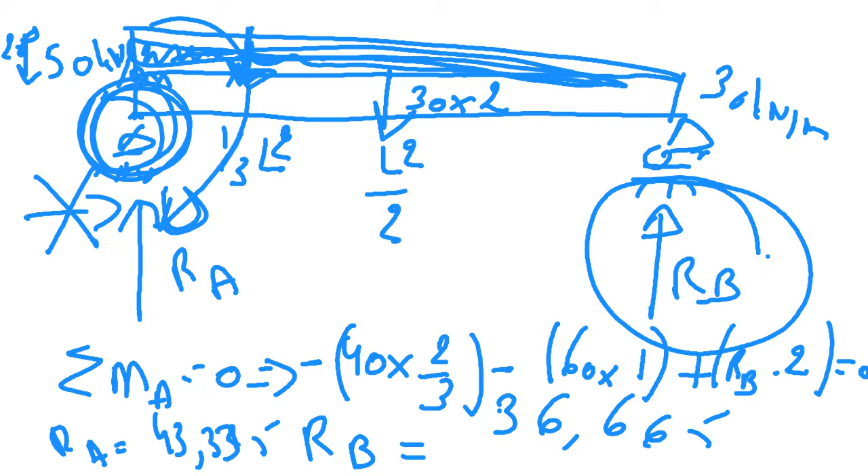Okay, Tristan. What do you need to do? We position ourselves virtually here in RA. This is where we are located. And we are looking at all the moments acting upon the beam, and all those moments should be equal to 0. The first moment is this one, acting clockwise, which is this force, 40 kilonewton, at a distance of 2/3 of the length. So it's 40 multiplied by 2 divided by 3.

The other moment that you need to take into consideration is this one, the rectangular part. 30 multiplied by 2 is the rectangular surface, at a distance of half of the length. And then you have the last one to take into consideration, RB, acting this way, multiplied by this arm.

Okay, let me take a brand new one. You see it now or not? 1 second. How do I erase and take a new one? What is this? No. Eraser. No, I want to erase everything. Yes, clear. Okay. So what do you have? The simplification. 1 second.

Drawing. The simplification is this. RA. You have RB. You have in the middle the rectangular part, which is 30 multiplied by 2 at 1 meter. RB is at 2 meters. This is 0 meters of the beam. And then you have here the triangular part at 2/3 of the length of the beam. You have a force of, what did I tell you before? 20 kilonewton multiplied by 2 divided by 2.

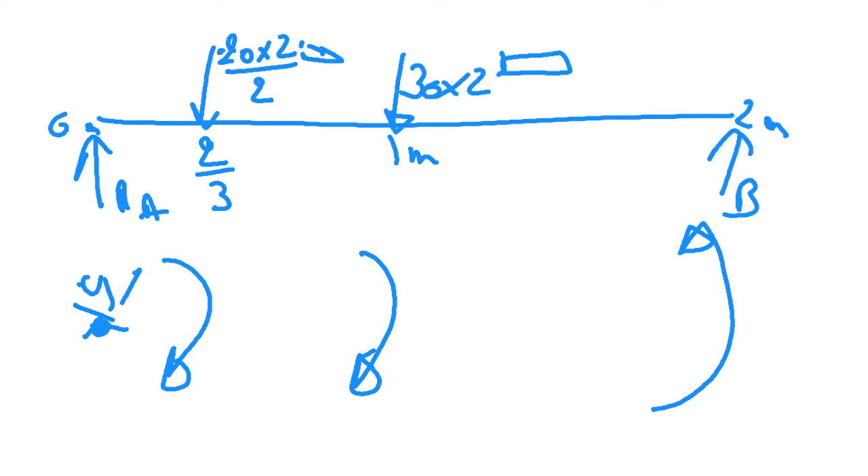Okay, perfect. Good. So now we have a view over all the external forces. So I can take a new one. We can calculate it again, or make a drawing again, but now take into account all the external forces with values. So we have RA, which is 43.335, and at the end we have RB, which is 36.665.

What is now the question? I think the question was: what are the shear forces and the bending moments in the middle of the beam? So here at 1 meter, what are the shear forces and the bending moments?

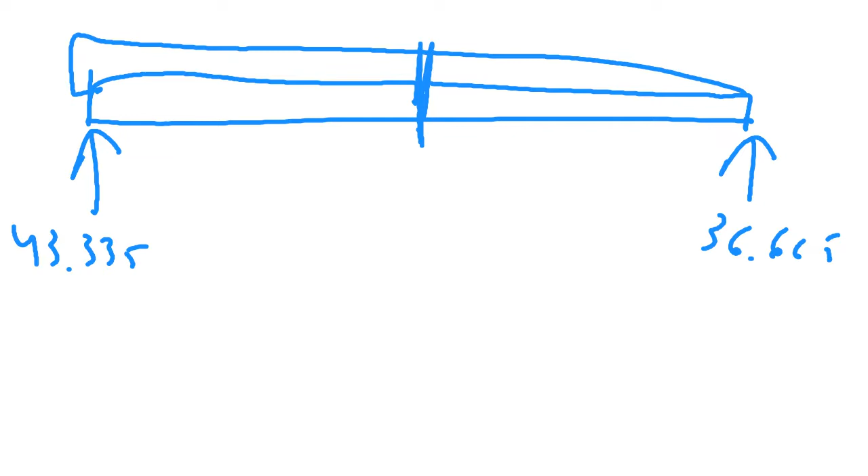If you take into consideration the simplification used for calculating RA and RB, you make an error. Why? That simplification replaced this load with two resultants, one at the middle, the other at 1/3. If you do that here, you do something wrong, because at the 1 meter location, you only have to take into consideration all the forces acting upon the beam on one side, only on this side, not all the forces. That's what's happening here.

At 1 meter, you need to counteract all the forces acting upon the beam up front, or you can look from the other side as well. You can choose which side you look from, right to left or left to right. But you are the microbe in the middle, and you need to counteract looking from one side. You choose which one, it does not matter. It's up to you.

Now, to make my life easy, I use the right part to make my calculation. Why? Because you see here a nice rectangular shape and a nice triangular one. The other side is also easy, but now we are lacking time, so I'll try to finish in time.

So what do we do? We translate this into a force taking place in the middle, which is how much? 30 kilonewton over 1 meter, which equals 30, taking place here at 1.5 meter. And we have another one here, 1/3 from the middle, which equals the length, 1 meter, multiplied by that respective height. Now it's easier because it's in the middle of a triangle, and it's 10 kilonewton.

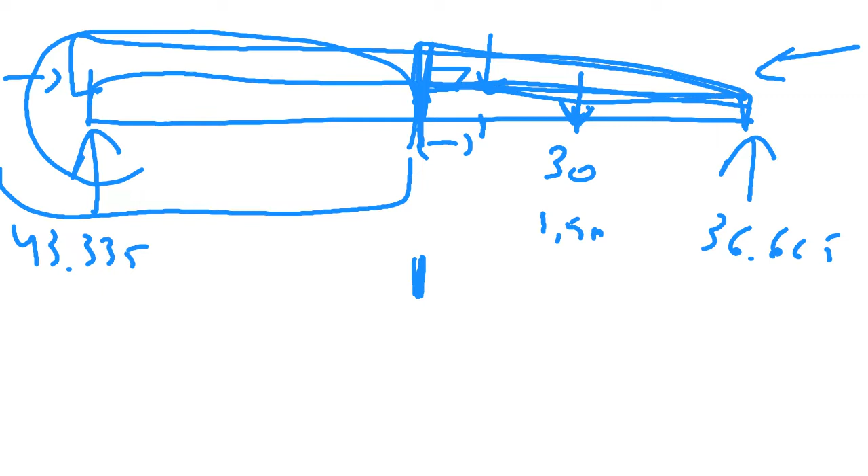Okay, how do you need to calculate this in case you're not aware? But this is basic mathematics. Normally I know I have to explain it to you, but it should not be part of what I need to explain. But okay, I'll do it anyway.

If you have a triangle, and this you need to remember, a triangle like this one has a height, let's call it small b, and a length, let's call it small a. Then this height at any part is of course in relation to what? In relation to this length.

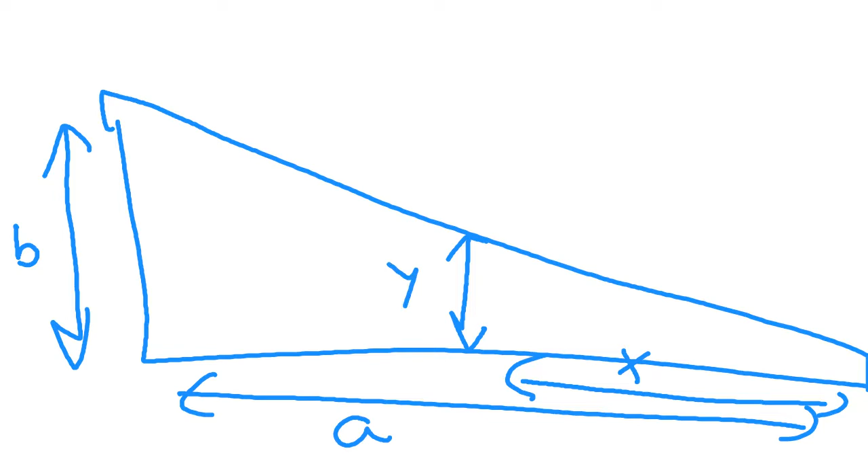So we can call this x, we can call this y. What do we say? The ratio of b over a equals the ratio of y over x. So if you know this, then you know what this value should be. Now it's easy because it's halfway, and this was 20, so halfway this should be 10. But you can calculate it also just using this basic principle.

And so you can make this any equation at a certain distance x, and you can calculate the value y. This you will need to use, of course, in all the exercises that follow. But this is things that you need to do at home. You practice at home. This is basic mathematics.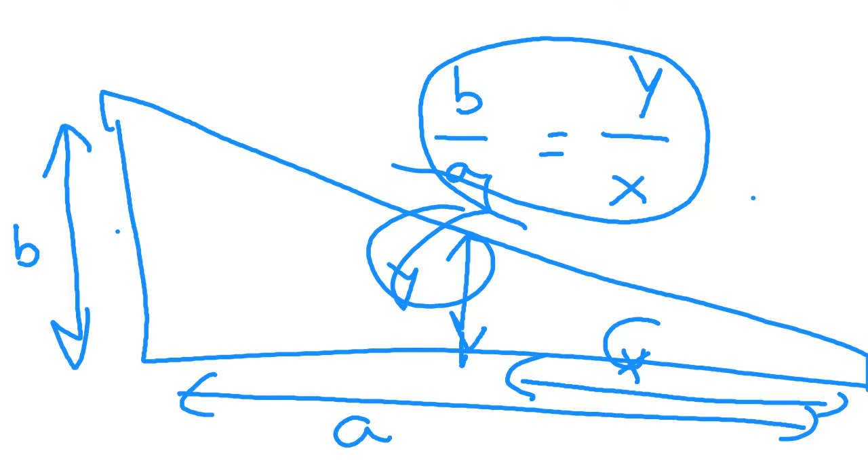So if you will do the simplification and you want to calculate the shear force and the bending moments in the middle. Oh, wait, I have to be here. Yeah, that's why I prefer in a classroom rather than online, because I really do not like all these things, but okay, we'll have to.

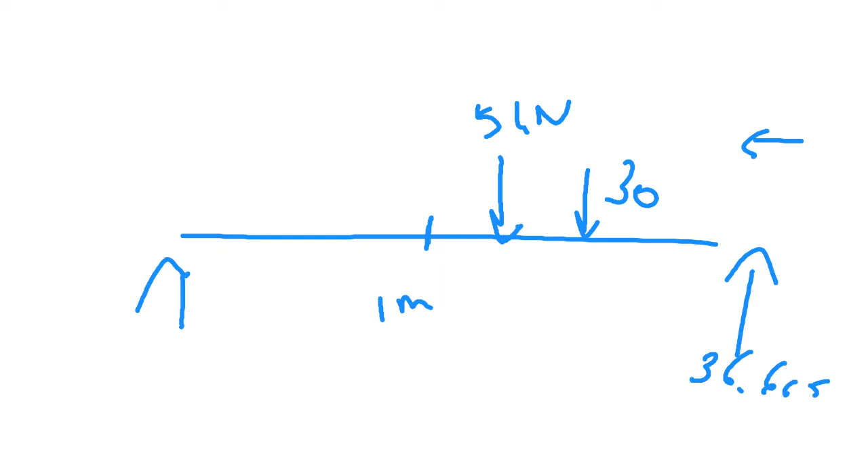So what do we see here? Our beam, we have an RB, we have our RA, we have here at 1/3, a force of 5 kilonewton. If you calculate it correctly in the middle, you will have your 30 kilonewton. And then again at 1 meter, if you look from here to there, the sum of all the forces is easy because RB we calculated before, 36.665. So meaning that your shear force here is the sum of all the forces you encounter, which is 36.665 minus 30 minus 5. And then you have your shear force value at 1 meter.

What is the bending moment value at 1 meter? Force multiplied by arm. This multiplied by this arm. 30 multiplied by this arm. 5 kilonewton multiplied by 1/3 here, which is this arm, 0.333 because it's 1 meter. And 30 at 0.5 meter. And they will end up in your bending moment. And that's how you have to reason shear forces and bending moment calculations.

And that's how I use the simplifications with those shapes, triangular, rectangular, and I try to make simplifications which are, of course, valid for what you need to calculate. And that's your exercise number 5.

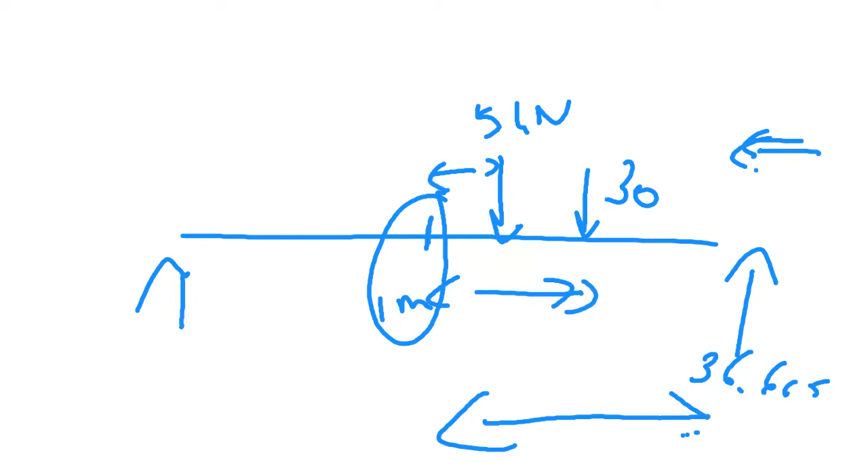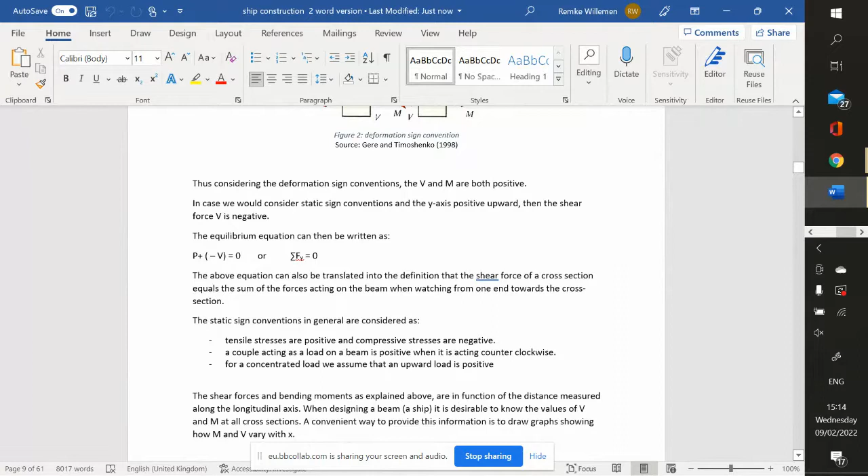So what you need to read at home? You need to read the introduction, which is background knowledge, that explains you about the shear force and the bending moments, the introduction for the bending moments. What is a shear force? What is a bending moment? You will see the figures coming from the presentation, you will have them again only explained in wording, so you can read it at your own pace. For those who missed out, you can read it all.

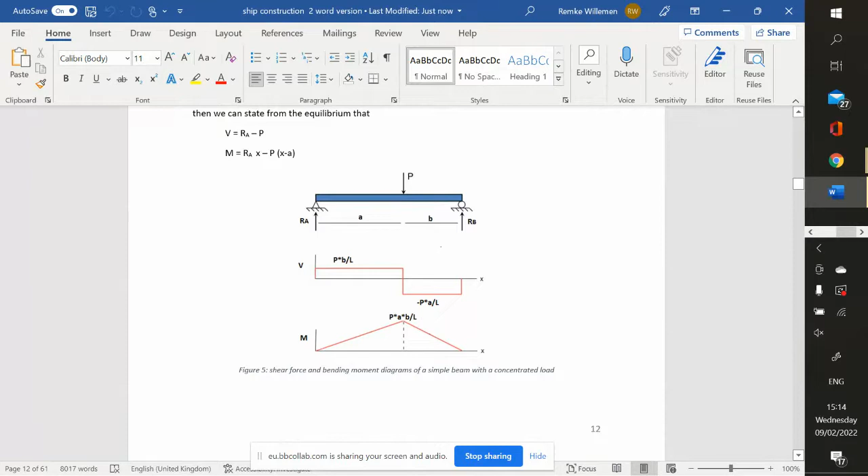You can see the supports, what they're like, all the loads you can encounter, and then you will see examples explained to you without figures, but in equation style. And you see here as well examples of the diagrams of shear forces and bending moments, how it evolves in case of a point load. You have here the exercise of a concentrated load, which I want you to make at home. I want you to make and prepare for next week, exercise 1, 2, 3. Only if you have problems, if you indicate it to me, I will treat your problems. So you have to make them at home.

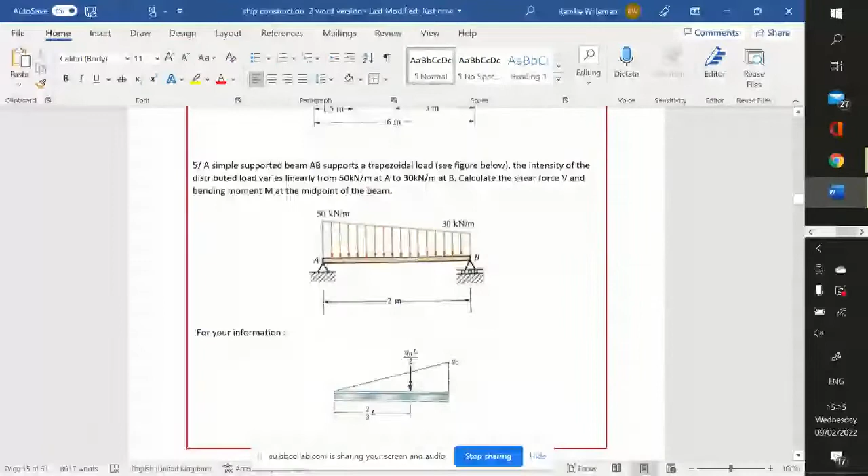Then you will have here the uniformly distributed load explained in equations. And then you have to make exercise 4 and 5. That is what I want you to do minimally. I know you have other things to do as well, but that is a start. You will see completely at the back of this Word document additional exercises. One second, additional exercise.

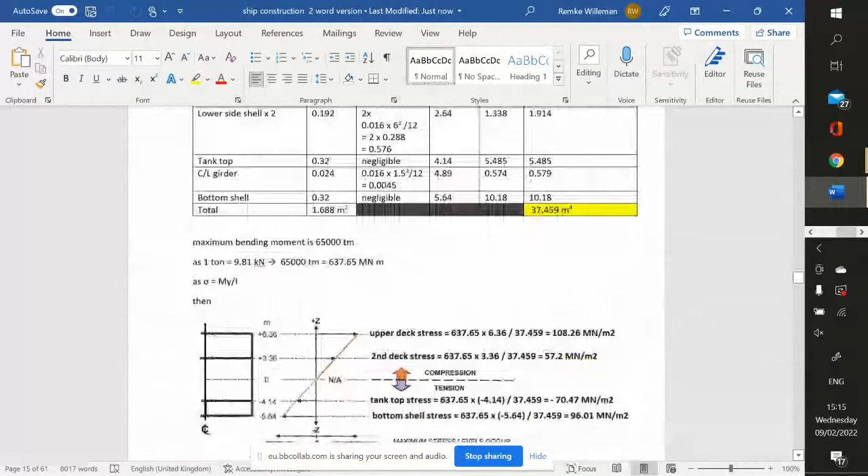That's all what we're going to treat in the future. The additional exercises start on page here. Additional exercises, yeah.

From exercise number 12, you can only calculate maximum permissible load. You're able to calculate A, only A. B you're not able to calculate yet, we didn't treat it yet. It's a nice example. If you're able to calculate this, you know this is an example of something more difficult than you will get on the exam, because you have to reason a little bit further. On the exam, it will be quite copy-paste of what we treat in class, but with different figures.

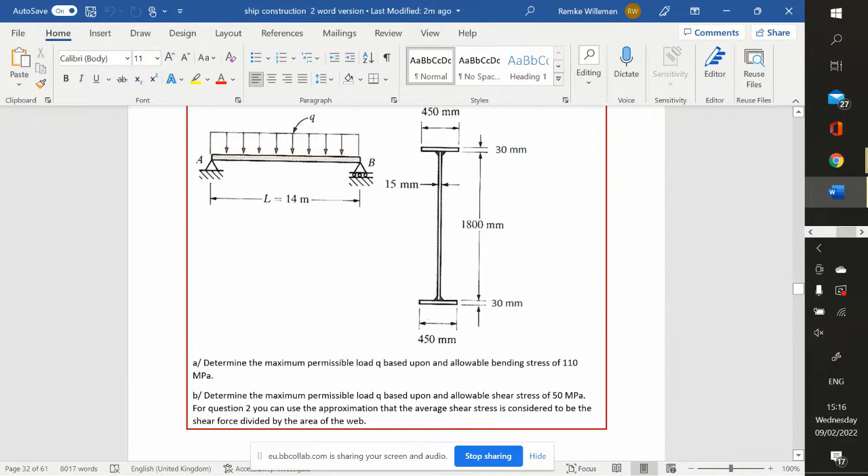And what you see on the film, you need to look at the film as well. What you can do too if you like is 13A, again only the A's. Not yet the B's because you're not able to solve it yet, but you can solve question A here.

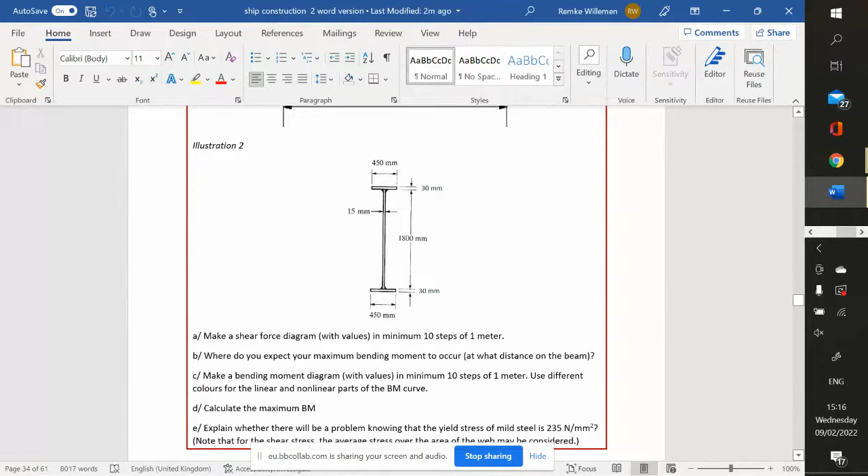You can solve here again from question 14, question A, only the A's. B you can do it here as well, A and B is possible. The diagrams as well, maximum bending moment you can calculate too, and you can do A, B, C, and D in this case from exercise number 14.

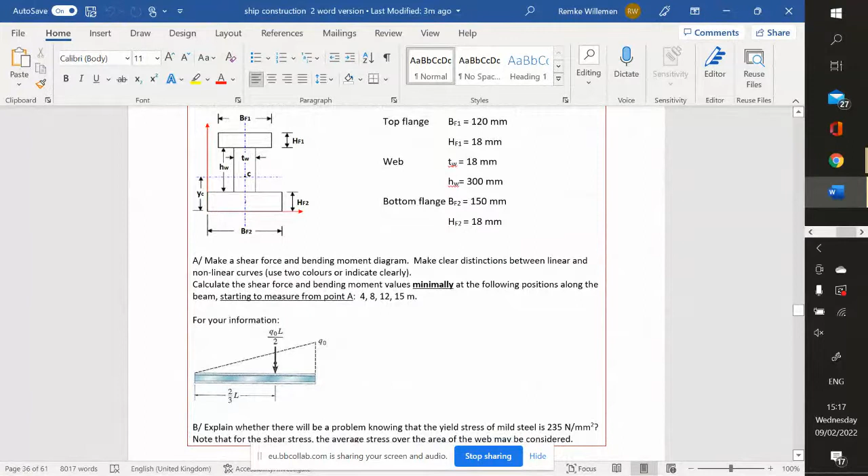Exercise number 15 you can make completely without any problem. Exercise 16 you can make as well if you like. Exercise 17 you can only make the part A, not the part B. It's not possible because you do not have the knowledge yet.

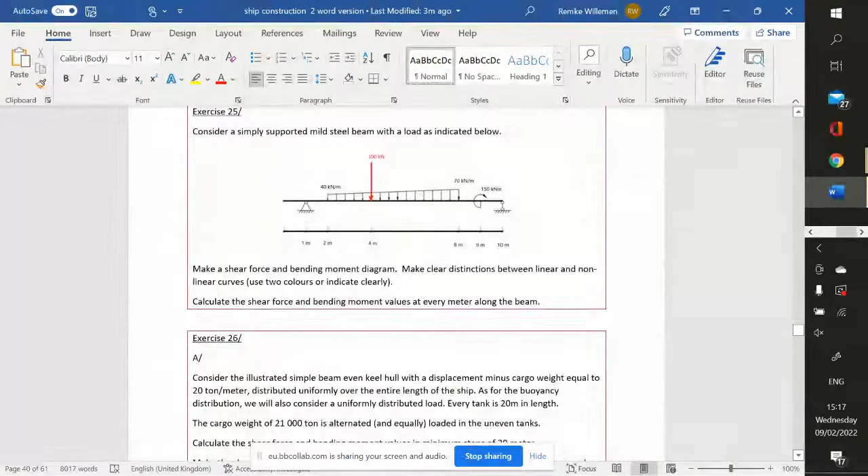18, not yet, that's for the future. 19 you can make, yeah. 20 as well, 21 as well, 22 as well, 23, 24, 25 you can make as well. And there it stops, I think. 25 is a new one for those who followed the courses last year.

So you see, there's a lot you can do at home to practice, and that's what I'm asking you now. It's only the first step, we will do much more than this. So just simple beam calculations with point loads and uniformly distributed load is the first course and the first thing you need to practice at home.

If you're not able to do all exercises, no problem. Next module, if you indicate me, I will organize an extra session together, like a kind of a monitorat as they call it, to guide you through exercises that you have difficulties with. Then we do it in class. But next week I will continue with a new topic in a way, but it's similar to what we have seen, and I will start with solving your questions.

Is that clear for you? Or do you have any question still? You will try to do it, try to solve it.

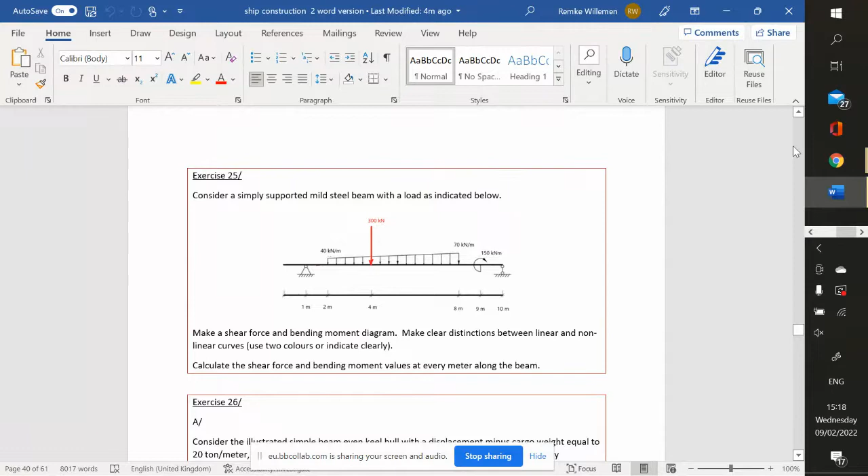Some people might say, oh, what is this here, a part of a beam with nothing happens. What is your shear force here at this part if you're located here and you take only this part into consideration? It's zero, huh, there's no force, so there's no shear force in that part of the beam. There's no external force, so there's no bending moment. It's zero. If you look from here to there for this part only, if you take that into consideration.

So the logic, if you follow the logic as I explained to you today, it looks new, it looks more difficult, but in a way it's not. There's no shear force, there's no external force at that part. There's no bending moment because there's no external force if you consider left to your location as a microbe in your beam.

I will send you the link to the movie as well, because I didn't think I sent you the link to the movie. It's in the updated version of the PPT, yes, but you don't have the updated version because it was added on recently. But I will give you the link of the PPT straight after now of the movie, because the movie also helps you to solve the questions in case you have problems with the exercises. So look at the movie as well.

Yeah. Okay. Questions so far? Not yet. The challenge, of course.